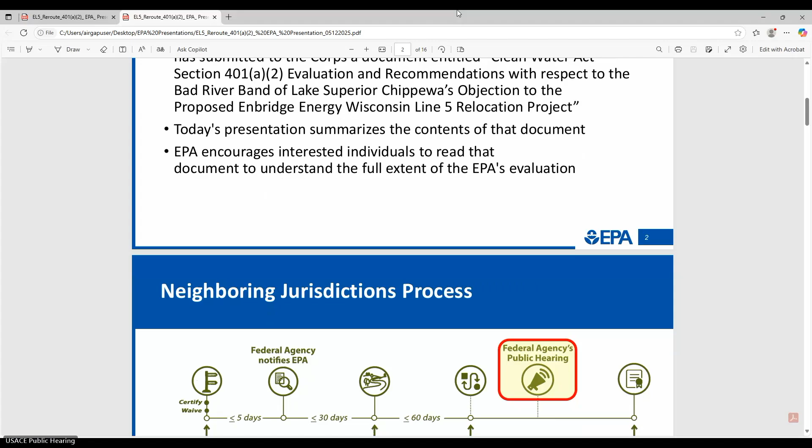I'd like to start by providing a bit of an overview of the neighboring jurisdiction process as outlined by Section 401A2 of the Clean Water Act. This begins on the left-hand side of the figure here, when a federal agency, in this case the Corps, receives an application and a certification or waiver from a jurisdiction. In November, the state of Wisconsin provided its 401 certification regarding the project to the Corps, which initiated a 5-day process for them to notify EPA of that receipt, which they did. That started a 30-day period for EPA to determine whether discharges from a proposed project may affect the water quality of a neighboring jurisdiction, in this case, the Bad River Band of Lake Superior Chippewa, and we made such a may affect determination in December.

This started a 60-day process for the Bad River Band of Lake Superior Chippewa to determine whether discharges from the project will affect its water quality so as to violate any water quality requirements. They did so in February and objected to the issuance of the permit and requested the public hearing that the Corps is hosting today. The Corps will collect information heard here and make its permitting decision.

So we are focused today on the proposed reroute around the Bad River Band Reservation. It is a 41-mile reroute of the Line 5 pipeline with projected impacts to include 101 acres of temporary impacts to 534 wetlands, 0.2 acres of temporary impacts to water bodies, including 72 jurisdictional crossings, and 0.02 acres of permanent impacts to wetlands.

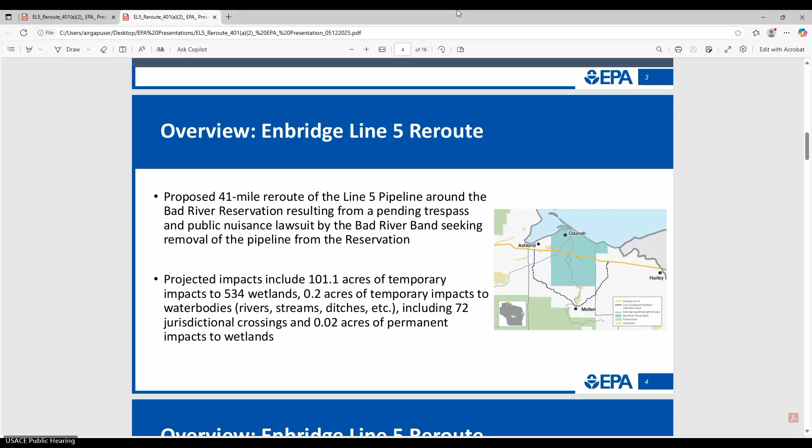Proposed discharges from the project to waters of the U.S. include construction matting placement to access construction areas, trenching to install the pipeline, blasting where hard rock complicates excavation, and horizontal and directional drilling and direct drilling to facilitate placement of the pipeline below water bodies to avoid surface disturbances.

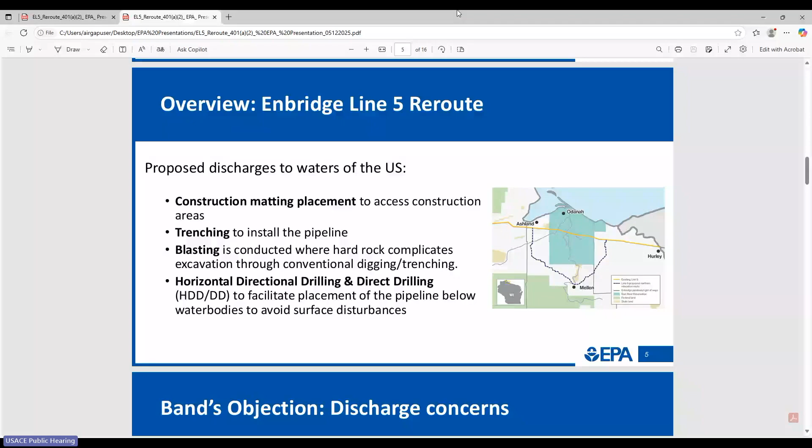I will now turn to an overview of the Band's objection. The Band's objection raised concerns with discharges of primarily four types of activities, the ones on the previous slide.

These include concerns regarding construction matting, including increased stormwater discharges, discharge rates, runoff, sedimentation, and thus increased turbidity, introduction and transportation of invasive species, and temporary impacts lasting longer than planned.

With regard to trenching, the Band's objection raised concerns for discharges for soil destabilization, sediment discharges, and pollutant transport, soil compaction and mixing, leading to discharges resulting in altered soil water holding capacity, hydrology, groundwater processes, soil and sediment chemistry, and invertebrate and wetland plant habitat, and possibly the release of mercury and methyl mercury.

The objection also raised trenching concerns regarding removal of vegetation from water courses crossed by open trenching that would result in impacts lasting longer than temporary or that will not be restored to pre-construction conditions.

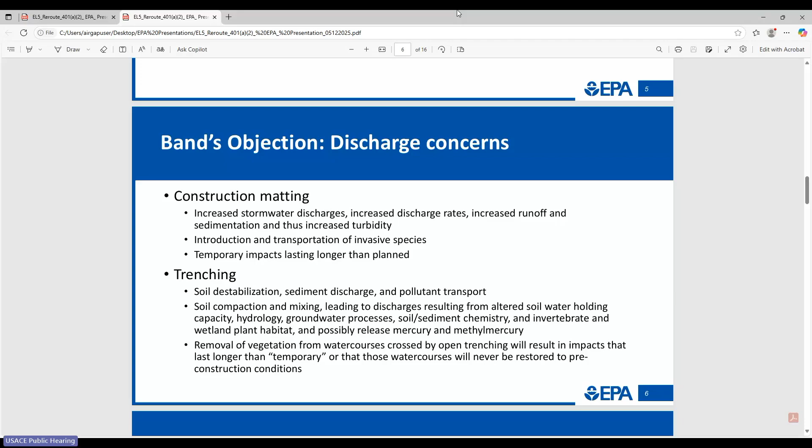The Band's objection included discharge concerns with respect to blasting, including the effect of blasting residue on water quality and the contribution of pollutant loadings to water bodies, specifically nitrates, fuel oil, perchlorate, mercury, and other chemicals.

Substances such as PFAS and PFOS, radionuclides, asbestos, arsenic, sulfur, and nitrates that may be discharged during the blasting process, and altered groundwater flow paths, groundwater levels, and groundwater surface water interactions, including changes in surface water temperatures.

The objection raised discharge concerns regarding horizontal directional drilling and direct drilling, including the permanent conversion of wetlands due to establishment of a permanent maintenance corridor, increased turbidity and impacts to macroinvertebrate communities and fish spawning beds, including lake sturgeon.

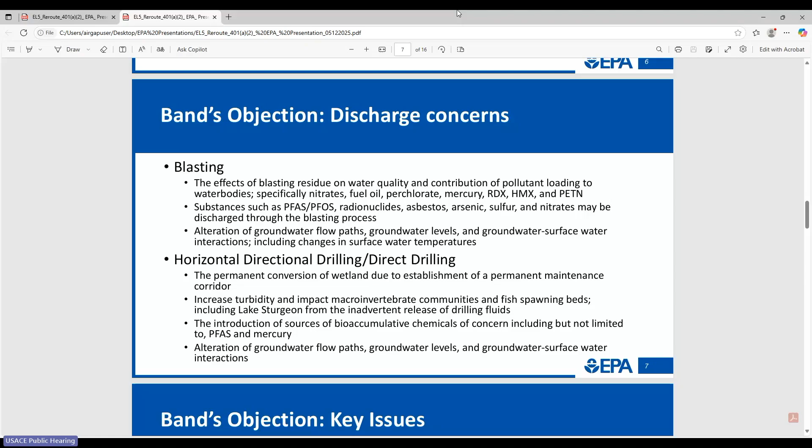And the inadvertent release of drilling fluids, and an introduction of sources of bioaccumulative chemicals of concern, including but not limited to PFAS and mercury, and also altered groundwater flow paths, groundwater levels, and groundwater surface water interactions.

The Band's objection raised key issues, including that conditions in Wisconsin's permit and 401 certification will not ensure that the Band's water quality standards and other water quality requirements will be met for regulated activities that discharge to waters located upstream or adjacent to surface water.

The objection said the project will result in non-compliance with the Band's anti-degradation provisions and the criteria, both narrative and numeric, derived to protect designated uses and existing uses of the surface waters within reservation boundaries, and will cause or contribute to lowering the water quality below minimum conditions necessary to support designated and existing uses of the reservation's waters and waters hydrologically connected to those waters.

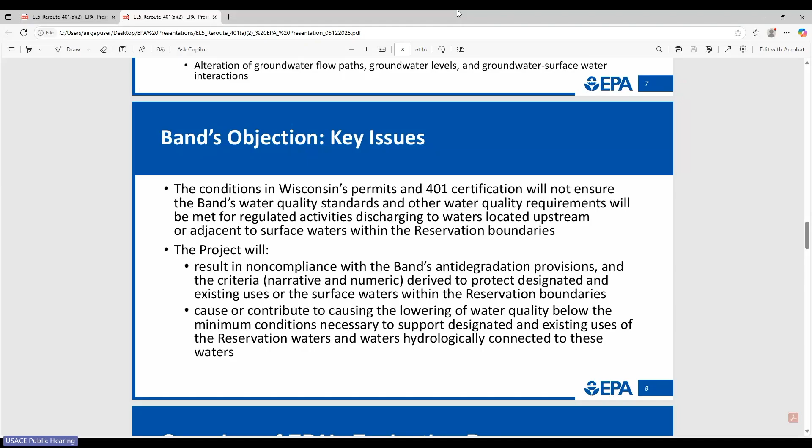So I will turn next to an overview of our evaluation process. Under Section 401A2 of the Clean Water Act, EPA interprets our role as an objective and neutral evaluator, providing recommendations to the Corps based on expert technical analysis of the objection and other relevant information.

We presented the full document for our evaluation and recommendations to the Corps, and are presenting an overview of that here, as directed by the Clean Water Act Section 401A2, that at such a hearing EPA will present recommendations with respect to any objection.

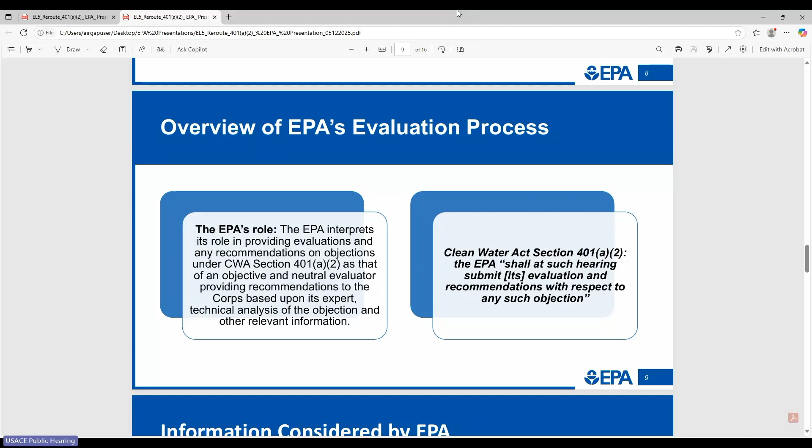We considered a wealth of information in our analysis, including documents from the Bad River Band and Enbridge, documents from the Corps and EPA, and from the Wisconsin Department of Natural Resources. Many of these documents have extensive appendices, addendums, and updates, and this includes all of those. So this might appear to be a short list, but it represents a wealth of information that we considered.

EPA also received new documents and data provided by the Bad River Band on May 6th, last week. Receipt of this information on short order before today's hearing did not allow sufficient time to conduct a thorough evaluation of it, particularly the technical memorandum, evaluation and impacts of Line 5 Wisconsin Relocation Project on hydrology and water quality at the Bad River Band's reservation. We did not have sufficient time before this hearing to analyze, draw conclusions, or form recommendations from this new information.

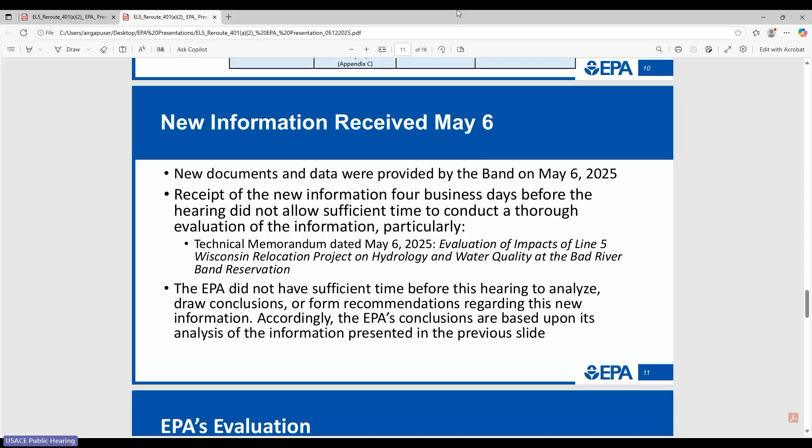Accordingly, our conclusions are based on the analysis of information on the previous slide.

In short, for our evaluation, neither the information provided by the Band in support of its objection letter, nor the information contained in other documents reviewed by EPA demonstrated that discharges from the project in any of the four categories, including pollutants in such discharges, will reach the Band's waters in amounts that will result in a violation of the Band's water quality requirements. The new information that we received last week, we have shared with the Corps for its consideration in its future permitting decision.

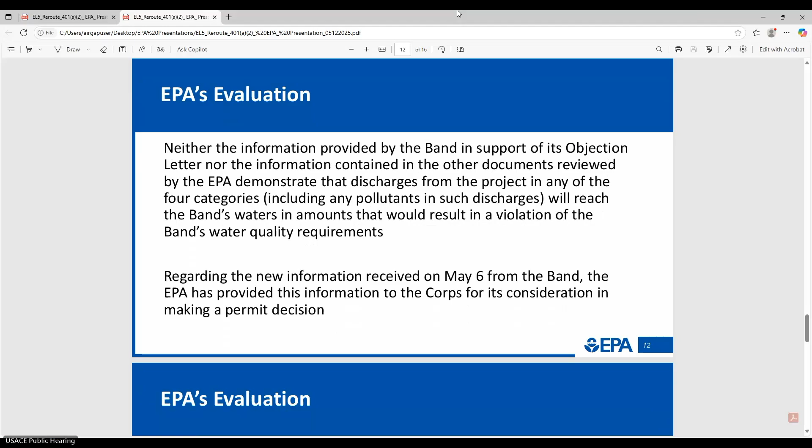For some more details on our evaluation, the objection cited two modeling efforts by the Band's consultants. However, neither the modeling report nor details regarding the data and methods were provided.

The objection asserted certain discharges will alter groundwater flow paths and groundwater surface water interactions. However, data, studies, modeling, or other analysis of these complex interactions at specific sites, or how the discharges would adversely affect the hydrology of aquatic resources, were not provided.

And the objection cited general articles, scientific studies, and case studies. However, none of them substantiated the Band's assertions about pollutants in discharges associated with the specific project reaching the Band's waters.

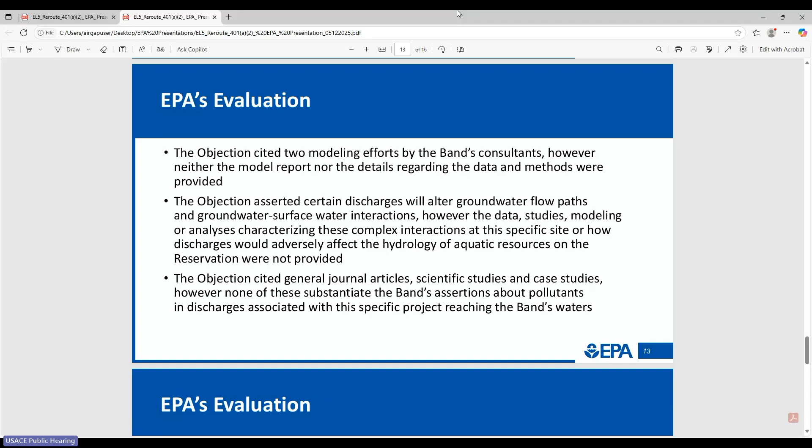The materials EPA reviewed did not provide data, studies, or modeling analysis that showed and quantified impacts of distance from any given discharge point to water quality on the reservation, the likelihood of discharges, including pollutants traveling from groundwater to surface waters and then to the reservation boundary, or predicted quantities of pollutants in Enbridge's discharges or receiving waters.

The materials did not compare predicted changes in pollutant levels against background conditions and natural variability, evaluate other impacts on the landscape, or demonstrate how discharges would adversely affect water quality so as to violate the band's water quality requirements. The only document that specifically addressed whether pollutants would reach the band's waters was a sediment discharge modeling report prepared by a consultant for Enbridge, showing that sediment discharges associated with the project will not have a discernible impact on water quality at the reservation boundary.

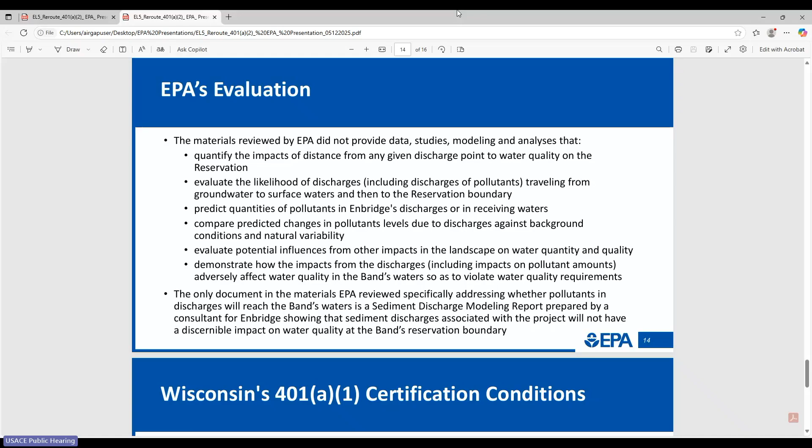EPA also evaluated Wisconsin's 401 certification conditions, and any Clean Water Act Section 404 permit, if issued, must include conditions from Wisconsin's certification, which included conditions for addressing all 4 discharge types.

Many of those conditions minimize the risks that discharges will adversely affect the quality of the band's waters, including best management practices for erosion control measures to reduce sediment transport, inspection and maintenance requirements for best management practices, construction matting and access roads, crossing waterways and wetlands, preventative measures to avoid the spread of invasive species, continuous monitoring for signs of inadvertent releases, and restoration requirements for disturbed areas.

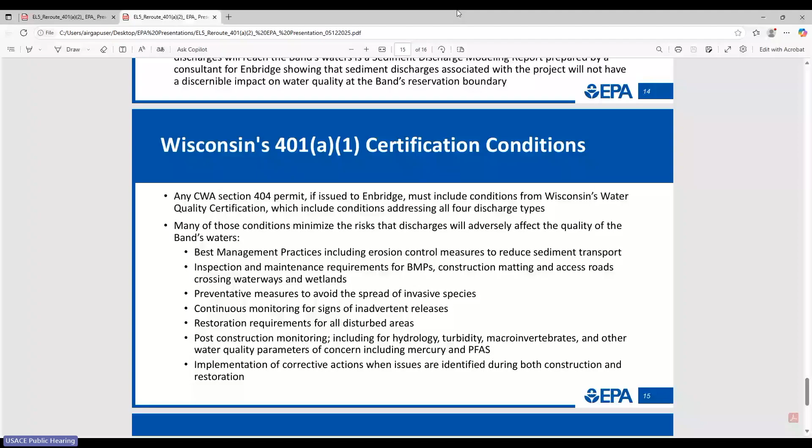It also included post-construction monitoring, including for hydrology, turbidity, macroinvertebrates, and other water quality parameters of concern, including mercury and PFAS, and implementation of corrective action when issues are identified both during construction and restoration.

So in conclusion, following the analysis described, EPA concludes that neither the band's objection letter nor the other sources of information that we reviewed support the band's determination that discharges from the project will affect the quality of the band's waters so as to violate any water quality requirements. Therefore, EPA is not offering any recommendations under Section 401(a)(2).

EPA also provided the information that we received from the band to the Corps for its consideration in making its future permitting decision. Thank you for the opportunity to join you this morning. I look forward to hearing the rest of the discussion.

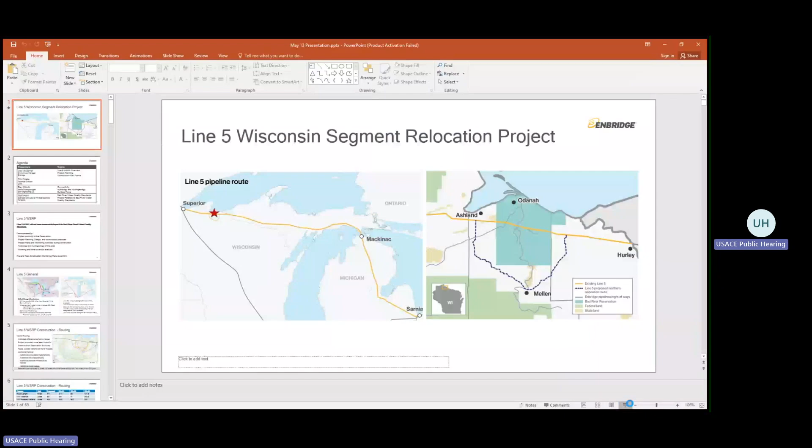Screen. Yeah, you got it. Thank you very much. Should be. There we go. Thank you. Buttons figured out, Tim? You got the buttons figured out? Yeah, just, I think so.

All right. Good morning. Thank you, everyone, for the opportunity to present on Enbridge's Line 5 Wisconsin segment relocation project. I'll refer to it as Line 5 or the project after this. My name is Joe McGaver, a manager environment projects with Enbridge. I have a chemical engineering degree. I'm a licensed professional engineer in Minnesota.

And I've been working on similar pipeline routing, execution, and post-construction monitoring projects for the last 18 years. The important context of that experience is having the opportunity for continuous improvement, knowing how things have changed, knowing the actions required to incorporate in the project to get the end result everyone desires. Also presenting with me today will be Tim Drake, Ray Wulo, and Matt Horn.

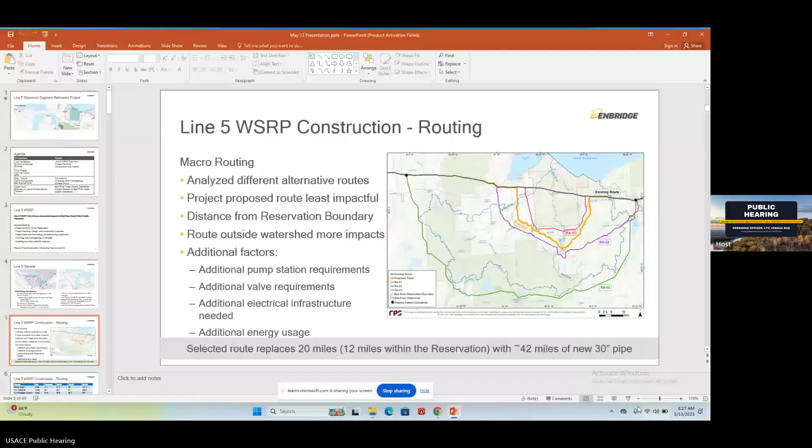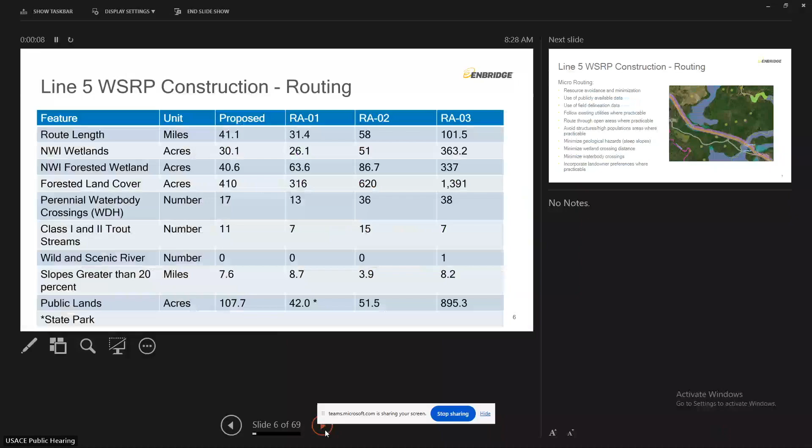The slide here covers the project overview. We did a lot of routing efforts.

When you look at wetland impacts after the routing, 0.02 acres of permanent wetland fill or wetland loss does occur on the project. That's roughly an area 30 feet by 30 feet, like a small house. When you look at a 41-mile project, that's a very small amount of fill compared to a development building structure or parking lot, which can typically go well beyond that in some instances.

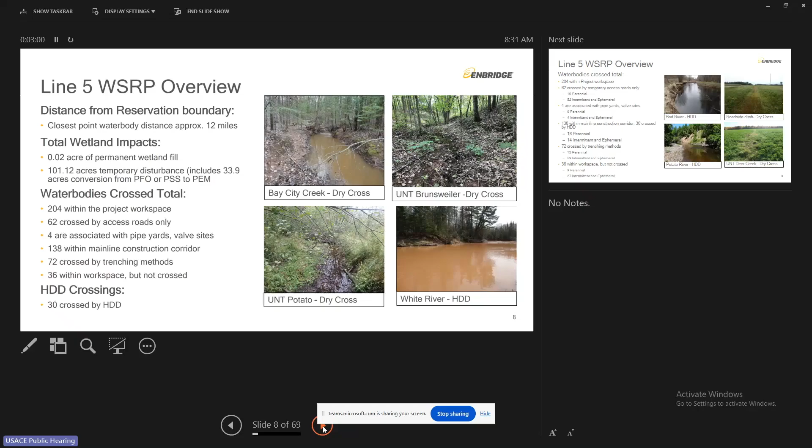More photos here. Upper left-hand corner is Bad River. Bad River will be crossed by HDD in the proposal.

You can see on the upper right-hand side, that's a road ditch, which is an ephemeral or intermittent stream, and would be turned to grass after restoration.

Potato River is in the lower left, also a perennial stream that would be HDD'd, and lower right is another example of an ephemeral or intermittent stream that only has water in it during portions of the year.

You can see the breakdown of the different features on this slide between perennial and ephemeral or intermittent water bodies, with many of the larger perennial streams being crossed by HDDs.

We do have some perennials that are open trench. There's 13 of them, and those are typically the smaller perennial streams on the project.

And you can see there's 36 water bodies in our workspace that are not crossed and would be controlled by erosion control devices, to be discussed later.

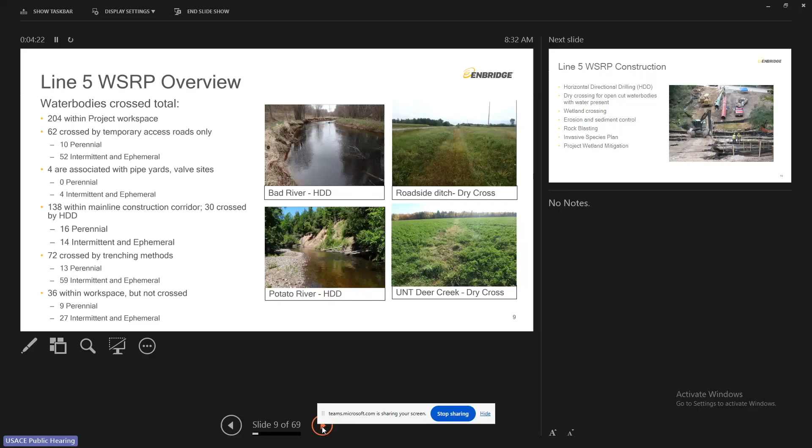The Line 5 project will not impact Bad River's water quality standards. We designed the project for that to be the end result. We'll cover horizontal directional drilling, dry crossings, wetland crossings, and other plans associated with the project to demonstrate that fact.

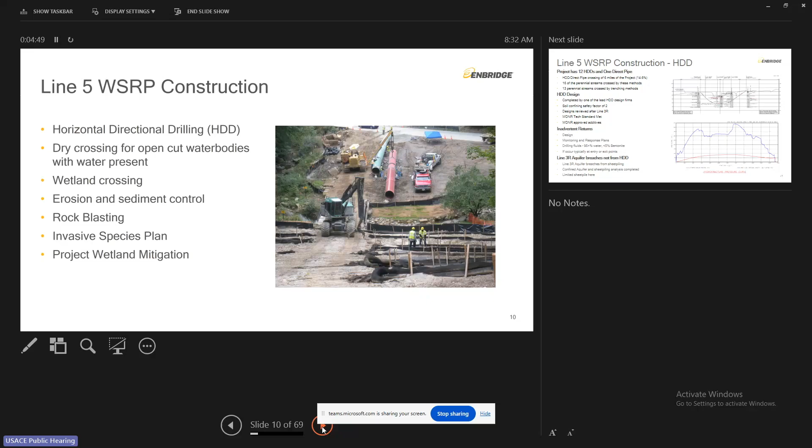For HDDs, we have 12 HDDs on the project, one direct pipe. We go through an extensive design process. We do the geotech to understand the substrate, and engineers then design the HDD.

You can see in the upper right-hand corner, that's a typical HDD profile, where you have your exit and entry points. Due to the curvature of the pipe, the deepest part of the HDD almost always ends up under the feature you're trying to cross. So you can see in this case, the pipeline is like 70 feet below the water body.

The lower right-hand figure, that's a hydrofracture pressure curve, and what that's done is it shows how the project's designed. The blue line is the soil confining factor. The red line is the anticipated drilling pressure.

So when you take the blue line divided by the red, that tells you the safety factor. You can see in this case, underneath the water body, the safety factor is well above 2.

At Enbridge, we don't want to have inadvertent returns as much as anybody, because of the impacts and then the extra effort to clean it up, and other social implications with having a release.

You can see on the hydrofracture analysis, as you get to the exit and entry points, that's where the soil confining capacity gets lower, which if you look at the profile, is because you're getting closer to the ground, so you have less soil to contribute to the confining factor.

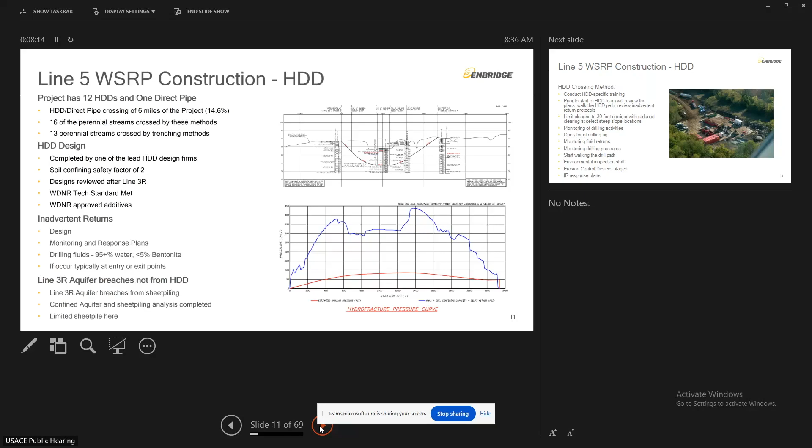So we've designed the project to not have IRs as a safety factor, but you still need to prepare for the what-if, since we're out there working in the environment. Our HDD process will have specific training for the contractors prior to pullback, and we'll have another review session with the team. We have equipment staged, and we have IR response plans.

The drilling operator monitors the drilling pressures to make sure they're not exceeding the pressure, which could overcome the soil confining pressure. We also monitor fluid returns, so if there's a loss of fluid returns, we would shut down the equipment, do extra checking to make sure there's not an IR, and resolve the issue should one occur. We have staff walking the drill path to identify IRs, and equipment staged in the unlikely event one does occur, to clean it up as quickly as possible.

A little bit on drilling fluids: they're actually 95% water, with roughly 5% clay, a little less than that. Drilling additives are all from the Wisconsin DNR approved drilling list. They're what's used in drilling water wells, and some of them are even used as food additives in other applications.

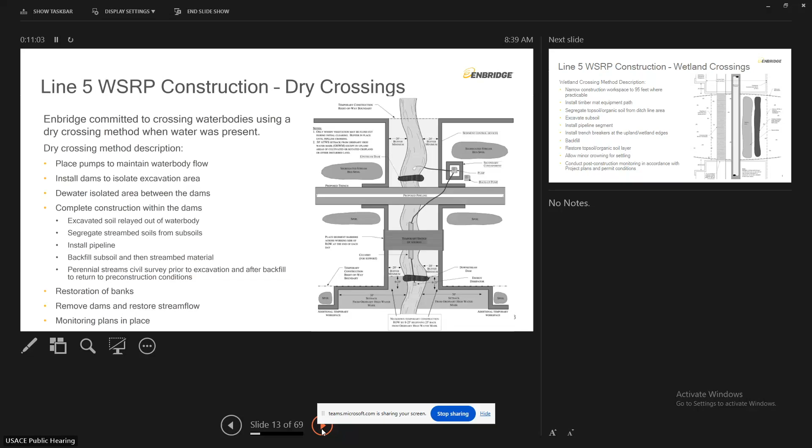Similar with wetland crossings, we've done minimization here. We've narrowed the construction right-of-way to 95 feet. We'll mat the travel lane across wetlands to avoid impacts. As far as wetland excavation, topsoil will just be stripped over the ditch line and placed on a visual barrier, typically straw. Subsoil will be in a separate pile. The pipe will be installed, and then we'll backfill in reverse condition and restore.

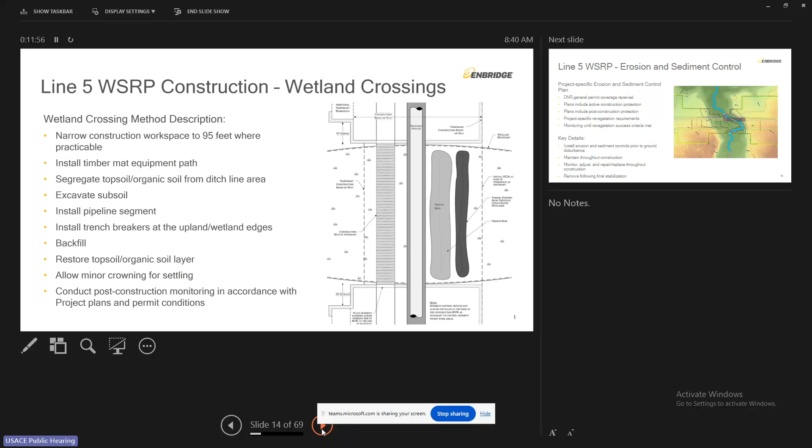We've learned over the years that restoring with a slight amount of crowning, to account for settling that occurs over the years, ends up in the best result. And then we do have our post-construction monitoring to verify results, which Tim will talk about later.

At this point, I'll turn it over to Tim for the next sections.

Good morning, folks. My name is Tim Drake. I'm a technical director of environmental inspection and compliance services within Environmental Resources Management Incorporated. I have both a bachelor's and master's degree in water resources, and I've been working on siting, permitting, construction, and restoration of linear projects for almost 30 years.

As part of the project, Enbridge has developed project-specific erosion and sediment control plans.

These plans incorporate best management practices to prevent erosion from occurring and to minimize the potential for sediment transport following a rain event, snow melt, or strong winds that could carry sediment into sensitive resource areas like water bodies and wetlands, potentially affecting water quality.

These best management practices, or BMPs, follow the DNR's technical standards and include controls such as silt fence, straw bales, biologs, erosion control blankets, straw mulch, and other products used in different applications and at different times throughout construction and restoration. Once installed, erosion sediment controls are inspected and maintained until vegetation is reestablished following construction.

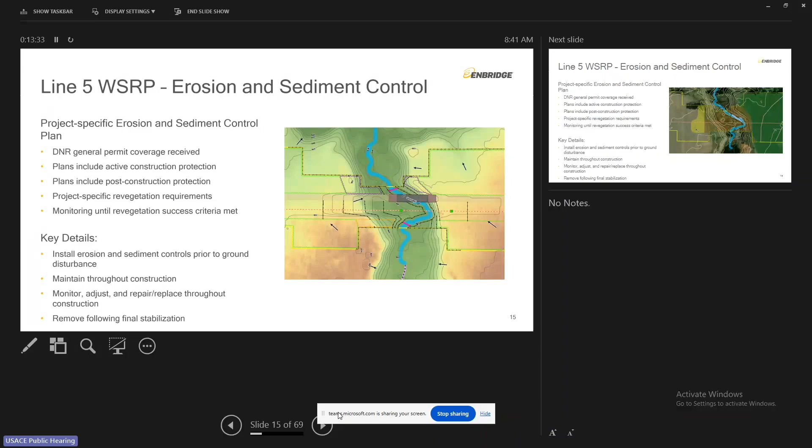The diagram here shows erosion control devices that were installed at a slope down to a water body that has been graded to allow for construction activities to occur in a safe manner to install that pipeline.

This next slide shows the exact same area, but the erosion sediment controls have been replaced, reestablished to account for restoration of the original slopes and contours at the specific water body. These will all remain in place until successful revegetation has been established.

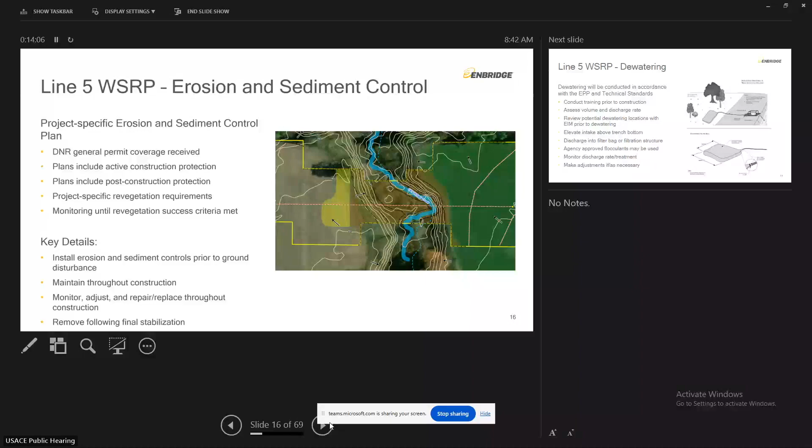Dewatering is part of the excavation process, or may be part of the excavation process, depending on groundwater inflow into the open excavation. It's needed to facilitate inspection of the excavation prior to installation of the pipeline to verify that the depth has been excavated to the right level, as well as that there's no obstructions in the ditch, such as a large rock that may damage the pipe or the pipe coating.

Dewatering, similar to erosion controls, will also be conducted using best management practices and in accordance with permit conditions to prevent affecting water quality in adjacent wetlands and water bodies.

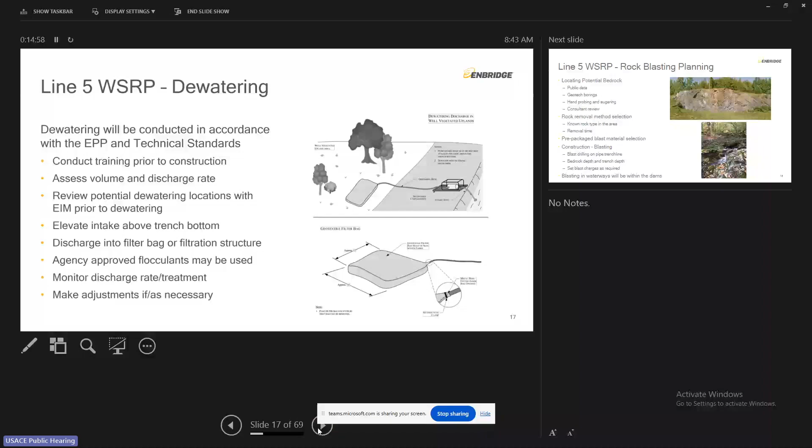The project has conducted extensive surveys to identify areas of shallow bedrock that will require the use of controlled explosives to fracture the bedrock and allow installation of the pipe to the desired depth.

Blasting has been used for other applications by other projects, such as highway projects in the area. The top photograph here is actually areas that were blasted for the construction of Highway 13 just outside of Mellen, Wisconsin. Blasting of trench excavation is not like what you see in the movies where a building or a car blows up, or as it's used in open pit mining, but it's actually a very highly controlled activity.

It takes into account the type of material and the depth of fracturing that's needed. The amount of explosives used is kept to the minimum needed to achieve that fracturing of the rock within the trench line. Where blasting is needed to construct across a water body, temporary dams, as Joe has explained, are used to isolate the construction work zone from the water body and water body flow, pumping that water around throughout the entire construction process. Ray will be talking more about blasting and groundwater in just a few minutes.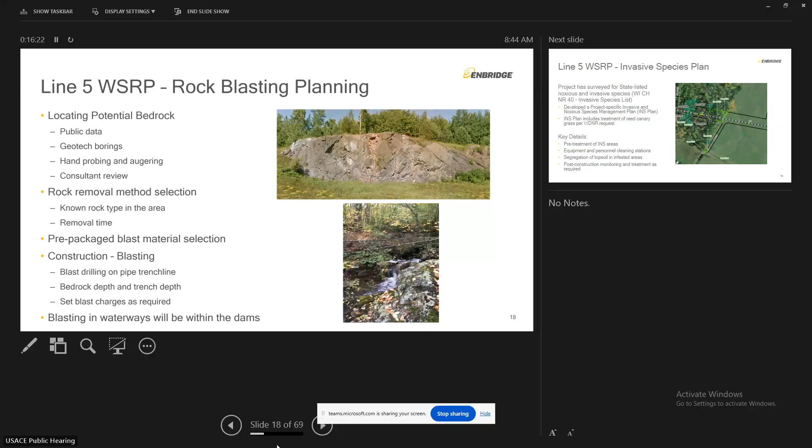The project has also completed extensive surveys for invasive species and has developed a project-specific plan to address invasive species. During our surveys, we identified over 23 different state-listed invasive species within our construction footprint, plus one additional species, reed canary grass, which Enbridge was asked by the Wisconsin DNR to treat as an invasive species, even though it is not a state-listed species.

The plan includes pre-treatment of the identified areas, as well as active equipment and personnel cleaning during construction. But it doesn't end there. Enbridge will continue to document the success of invasive species management throughout the construction process and will treat areas where weeds have been introduced or have expanded within the project workspace following construction.

The project has also developed a very robust water quality monitoring plan that incorporates the collection of water quality samples from both wetlands and water bodies crossed by the project, upstream and downstream of the proposed crossing location. Samples were collected in 2023 and 2024 across the project.

Data from these samples were used in conjunction with data from other water quality studies conducted in the region to establish baseline water quality conditions and get a better understanding of what those existing water quality conditions are within the region.

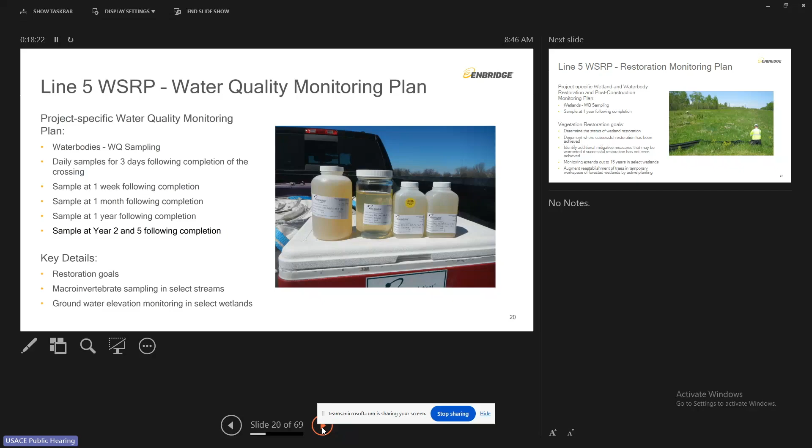In addition, the project has also developed a very robust post-construction wetland and water body restoration and monitoring plan that outlines specific restoration goals for establishing and reestablishing vegetation within this disturbed portion of the project right-of-way.

The plan includes wetland monitoring for up to 15 years following construction in forested wetlands, and replanting select tree species within the temporary workspace and forested wetlands to augment natural revegetation of trees that were cut during construction. Enbridge's revegetation plan will supplement the natural revegetation of areas disturbed during construction, reducing erosion potential and helping to restore the land to conditions similar to pre-construction.

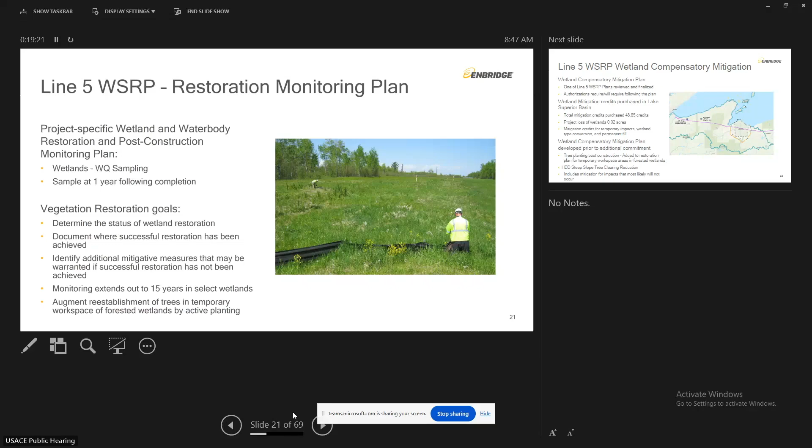Finally, the project has purchased compensatory wetland credits from mitigation banks within the Lake Superior Mitigation Bank service area to offset permanent wetland impacts, including the 0.02 acre permanent wetland fill, the temporary disturbance to wetland habitat during active construction, and the conversion of forest habitat to emergent-type wetland within the 50-wide operational right-of-way that will be maintained in non-woody vegetation to allow aerial patrol of the right-of-way as well as maintenance access for the project.

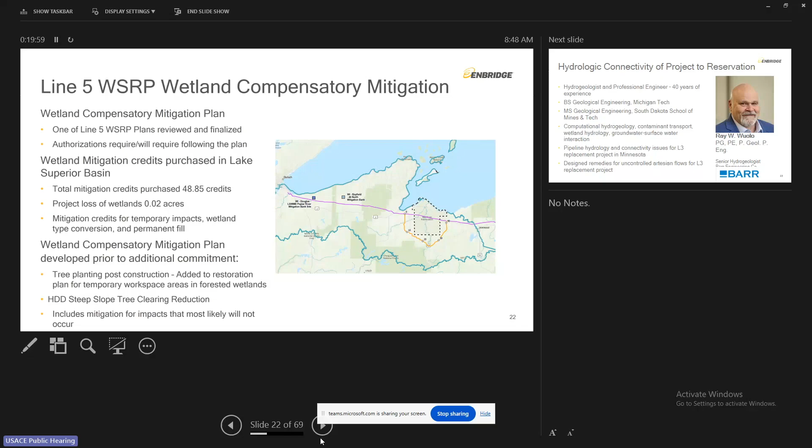Thank you, ladies and gentlemen. Thank you, Commander. My name is Ray Wuolo. I'm a hydrogeologist with Barr Engineering Company. My degrees are in geological engineering, and for the past 40 years I've lived and worked out of Minneapolis, primarily in the glaciated terrains of the upper Great Lakes. Most recently, in the last 10 years, I've been involved in the Line 3 replacement project, primarily looking at post-construction activities and monitoring. I was the primary hydrogeologist involved in controlling the uncontrolled artesian flows we're going to talk about, so I've had a tremendous amount of experience with the hydrogeology and surface water hydrology of pipelines in the upper Great Lakes.

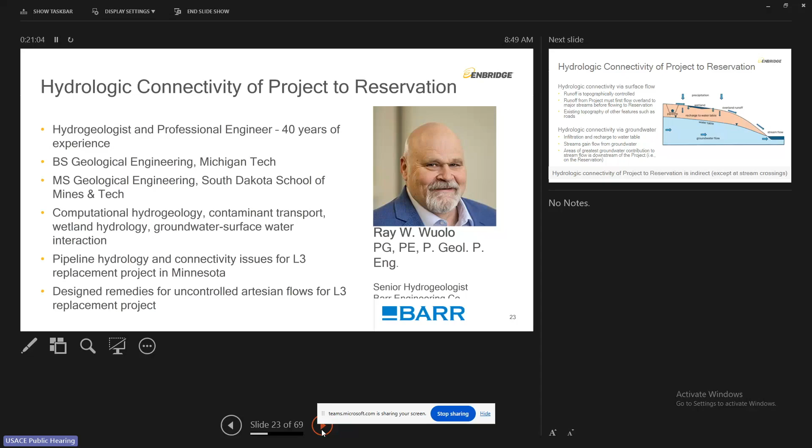Next slide, please. What I'm going to focus on here is the hydrologic connectivity of the project with respect to the reservation. I'll focus on construction and post-construction activities, the hydrogeology and surface hydrology associated with the construction area itself, and then those downstream effects as they would affect the reservation.

The runoff is the primary concern in terms of surface water hydrology, but the runoff that hits the project has to first run overland and flow into the major streams, and the major streams are the connective component from the project to the reservation. Existing topography and other features such as roads and bridges are also a factor in that connectivity.

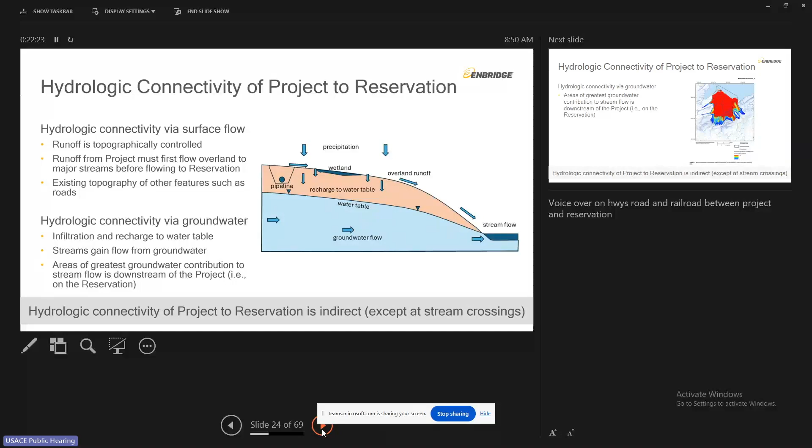In terms of groundwater, infiltration and recharge to the water table has been brought up as a concern, and also how groundwater flow would affect stream flow gains, or lack thereof. The areas of greatest groundwater contribution to stream flow are actually downstream of the project. Most groundwater flow into streams actually occurs on the reservation itself. The hydrologic connectivity of the project to the reservation is indirect everywhere except in the immediate vicinity of the stream crossings.

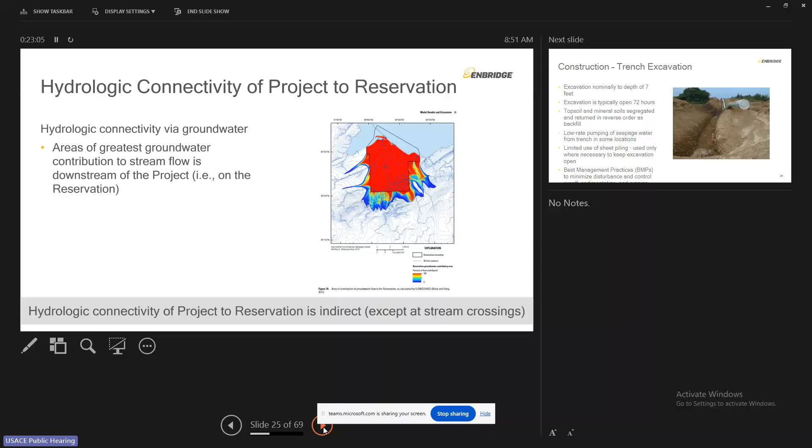This picture is taken from a 2015 USGS groundwater surface water modeling project performed for the Bad River Indian Reservation. What it depicts is, from their groundwater flow modeling, the streams and where the streams gain groundwater. I want to focus on the red area, which shows where the highest amount of groundwater inflow into streams occurs, within the reservation itself. Outside of the reservation there is some contribution to streams, but it's considerably less, and the project crosses those areas.

The first thing I'd like to focus on is construction, specifically what I'd consider a conventional trench excavation, using a backhoe to dig out the trench and lay the pipeline in. Excavation is nominally about 7 feet, varying with topography, but that's typically what we're looking at for this kind of pipeline burial. The excavations are typically open for 72 hours, just long enough to put the pipeline in and verify that it meets requirements, and then backfill begins.

As previously mentioned, topsoil and mineral soils are segregated. In most of the construction area, the topsoil is actually removed prior to construction occurring. In the trench itself, if there's any topsoil, it's laid out separately from the mineral soils below it. After the pipeline is put in place, the backfill is returned in the same order so the stratigraphy will be approximately the same as it was before construction.

As Tim mentioned, there will be some low-rate pumping of seepage water in some locations. In the upland areas, it's unlikely groundwater will be encountered, but as you get closer to wetlands and streams, the water table in this part of the world is very shallow, and there will be some dewatering over a limited amount, just enough to be able to get the pipeline installed and verified.

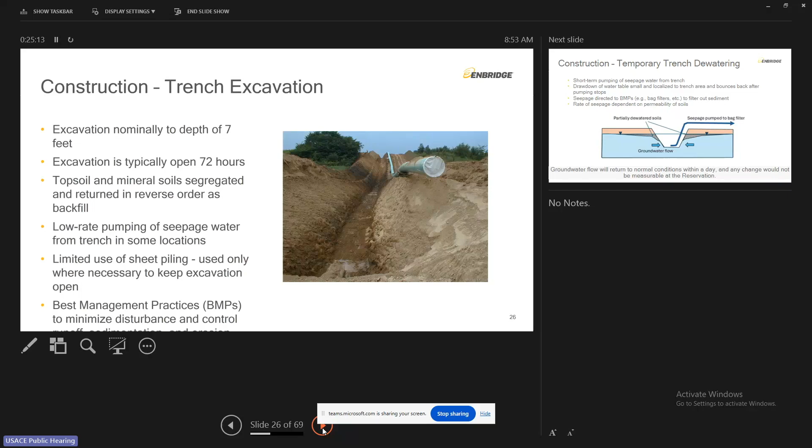In terms of dewatering, it's a short period of time. We're not using well points. We do the dewatering actually in the trench itself, basically evacuating water as the seepage occurs.

This does cause a localized bit of drawdown of the water table. And when I say localized, I mean a few feet. The drawdown is literally a few inches, except immediately adjacent to the slopes of the trench where you get a seepage face developing, but the drawdown is very limited. As soon as pumping stops, groundwater has an elastic response and comes back. That drawdown curve is logarithmic, so it's reduced to zero as you move away from the trench.

The seepage that's being pumped out is directed to various BMPs, bag filters as necessary, to take out any sediment, including colloidal material, before it's discharged to the ground. The rate of seepage depends on the permeability of soils. Normally, the groundwater returns to its initial condition about a day after construction occurs. In this localized event, there's going to be no effect on the reservation groundwater or surface water flows associated with dewatering.

The hydraulic impacts associated with the excavation are short term. There's a number of features included to minimize, actually to prevent, sedimentation. The thing that strikes me about this project is each crossing and each construction has its own BMP designed for the particular topography and setting, so it's not one size fits all. There's been a lot of thought put into making sure sedimentation does not occur at the construction, including delineating the work areas and stabilizing the topsoil. These impacts are going to be localized and short term, a matter of days.

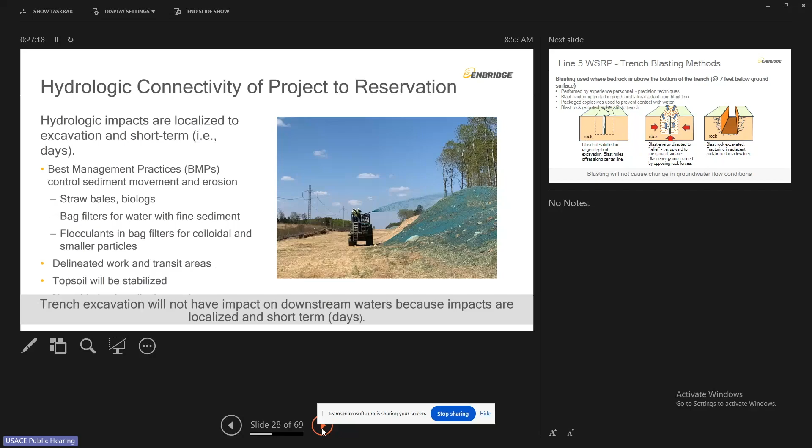Now, trench blasting gets, I think, a lot of confusion associated with it because people think about big explosions, particularly associated with mines. Trench blasting couldn't be farther from that. It's a very specialized form of disaggregation of bedrock. The blast holes are staggered along the trench line along its center line.

They only go to the depth of the target of the trench. The blasting takes place on the same day that the explosive is placed in each of the holes, and the blasting energy is directed upward — we call that relief. Many times people have tried to use explosives, for example, to enhance permeability for wells, and it doesn't work at all. The reason is the confining forces of the rock, both sideways and up, prevent that blast energy from moving out into the trench. So the material and the energy moves up — it's basically fluffing the rock, and then the excavator comes and removes that material.

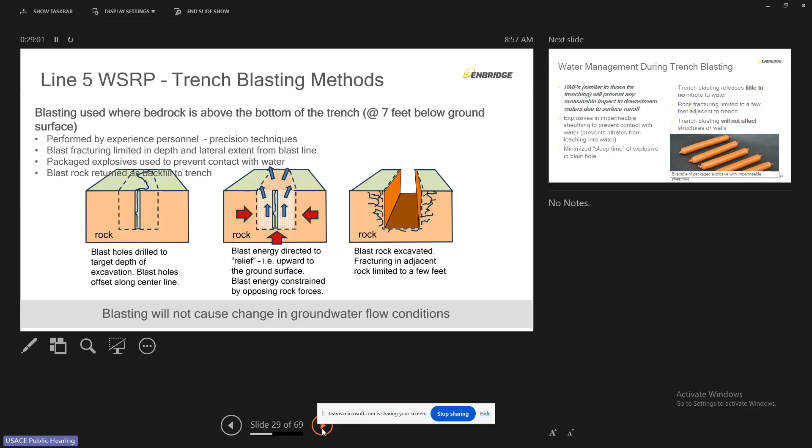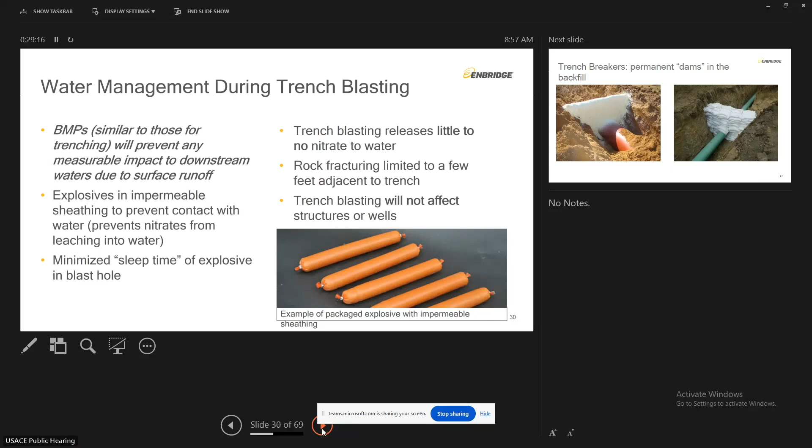During blasting, the BMPs employed will be similar to those used in regular trench excavation. One thing to understand is this type of explosive is a packaged explosive, sheathed in an impermeable material like a sausage, so it isn't poured down the hole, which is what is typically done in mining conditions. These explosives are designed for the size of the blast that's going to take place, and they're put into the holes.

The sleep time, the time that they're allowed to be in the hole where that explosive might be in contact with the water, is kept very small. What that means is that the leaching of any kind of nitrate materials from the explosive itself is essentially zero. And then when the trench blast occurs, there may be some residual, but generally speaking, these blasts are pretty complete. Matt Horn will talk a little bit more about what the consequences, or lack thereof, would be about the residual nitrate in the blast.

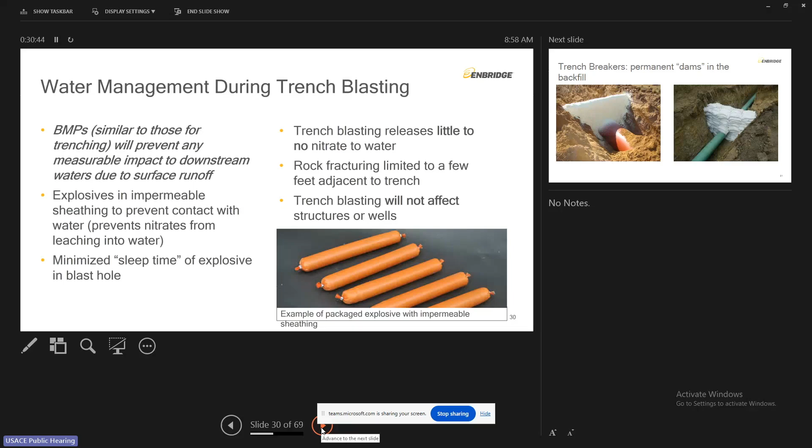The last thing that I think there's a great misnomer about is that trench blasting is going to affect structures and wells. They do not. I have seen situations where local well owners have complained about a blast after the fact, and when you look in the well, what you find out is the well is old. It has a lot of encrustation and material in it. It probably had problems with iron staining beforehand, but explosives in this condition are not going to affect wells, and the wells and structures are very, very far away from any of the blasting.

Once the trench, either blasted or excavated, is constructed, in some locations there will be what is called trench breakers installed in the trench. They're essentially underground dams, and they're either a foam material that's sprayed in, or, in the case on the right-hand picture, sandbags with an impermeable cover. What they're designed to do is prevent groundwater flow from moving along the backfill after it's returned into the trench, essentially preventing the excavation from acting as a French drain.

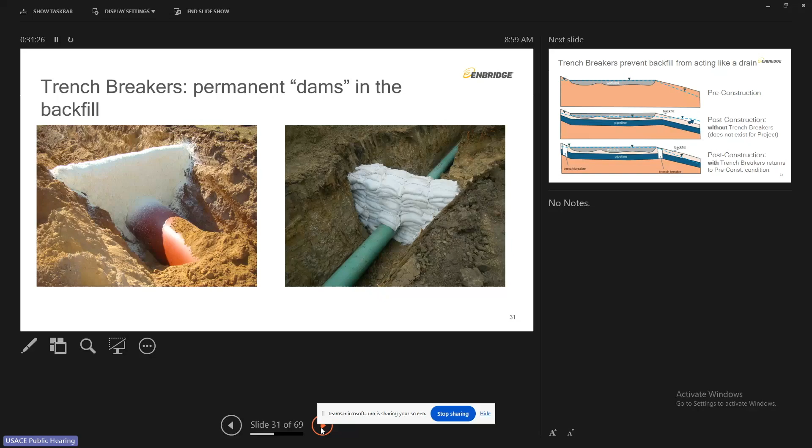Here's an example of how this works at a wetland. On the top slide, we have a schematic cross-section of the wetland with the water table shown, and you can see the water table is right about at ground surface in a wetland, as in many cases it is.

When the construction occurs, there will be a trench installed through the wetland and the pipeline placed, and then the backfill returned into the trench in the same order that it was removed, or actually reverse order, so that you have the mineral soils first around the pipe. If you didn't do anything else, that pipeline and its backfill could become a conduit for preferential flow that could cause some drawdown in the wetland.

The way to prevent that, and this has been a very tried and true method that I've seen many times in the upper Midwest in pipelines, is to install these trench breakers on either side of the wetland. What that does is make the water level in the wetland equal all the way across, and two things happen: you don't get any drainage of the wetland, and you don't get the development of any seeps down gradient of the wetland.

In the last year and a half, I've done some monitoring up on Line 3 at various locations where we've put in very discrete multi-level piezometers in and around trench breakers, and they are extremely effective at preventing groundwater flow from going across them.

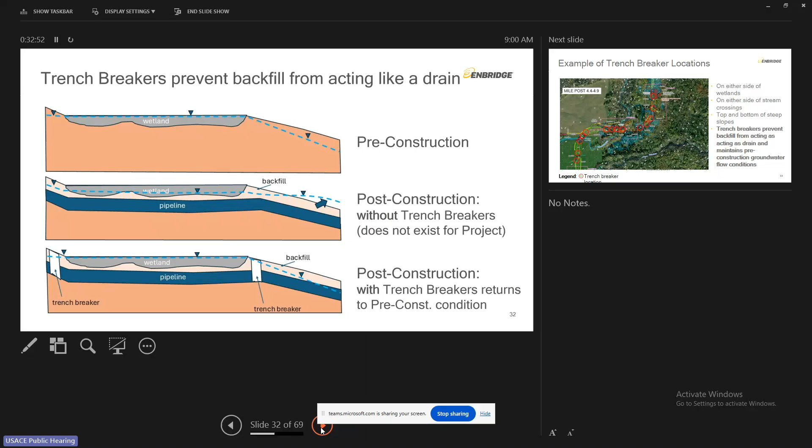Here's an example from this project of the proposed locations for trench breakers at mileposts between 4.4 and 4.9. What I want to draw your attention to are these red circles. Each one of those red circles is a location where a trench breaker has been planned to be placed. You can see that there's over 10 trench breakers in this small area.

They go along either side of wetlands, and along either side of stream crossings where the slope of the topography is relatively steep. Multiple trench breakers will be placed there so that there wouldn't be gravity feeding down into that pipeline backfill material. The trench breakers prevent backfill from acting as a drain, and they maintain the groundwater at pre-construction conditions. Every segment along the proposed project has this kind of a plan where these trench breakers have been identified.

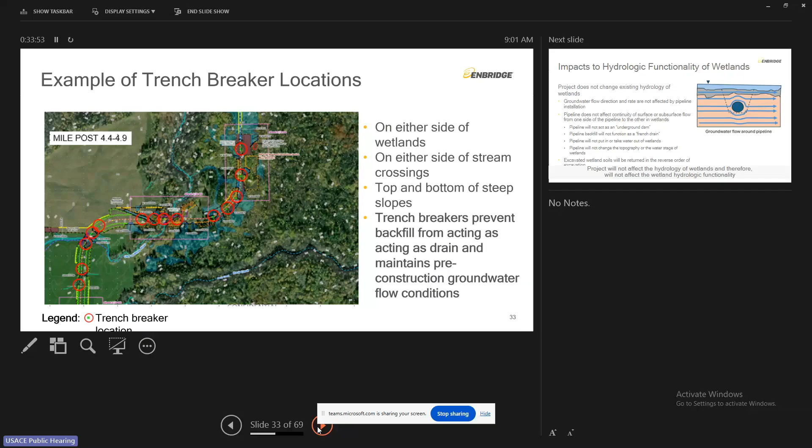I think another misnomer that occurs with regard to pipelines and groundwater is that a pipeline, which is inert, acts as an underground dam that prevents groundwater from flowing across it. Nothing could be further from the truth. Groundwater flows slowly. Groundwater aquifers are thick, tens of feet thick or even more in most cases. And what happens is groundwater doesn't even see the pipeline.

I've often used this analogy: a pipeline in groundwater is like putting a wire in a stream. The flow just doesn't see that; it just goes around it without any impact. I have never in my career seen a pipeline buried properly, that is, not at the ground surface, act in any way as a dam. The excavated soils are returned in reverse order, so the hydrology of the wetland and its functionality will be similar to what it was before construction.

Talk a little bit about artesian conditions, because they did gain notoriety in the Line 3 replacement project.

I want to mention what an artesian condition is before we talk about how this project is addressing that. An artesian condition is where groundwater is under pressure, under what we call confined conditions, and there is either a well or some other type of material that penetrates into that, causing that pressurized water to not only rise above the confining layer, but actually rise to the ground surface. That's the origin of flowing wells. This is an example on the right-hand side of a flowing well, not as part of this project, caused by the pressurization of groundwater.

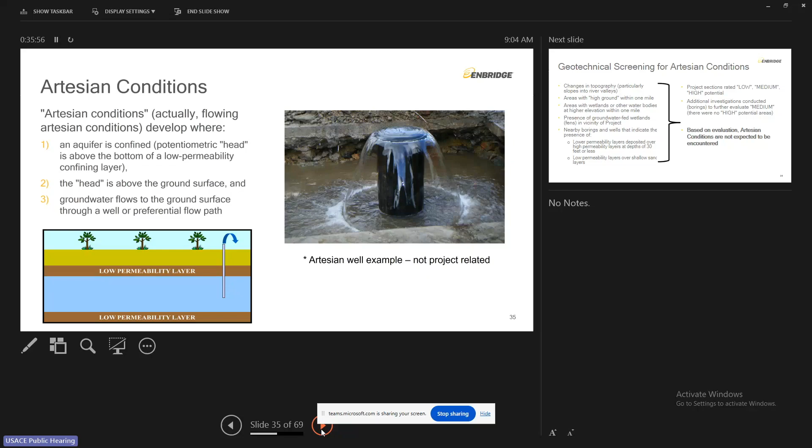So what have we done for this project as part of the artesian conditions? First of all, based on what we learned from Line 3, we went through an extensive screening process on this particular project, looking at the factors that might indicate where artesian conditions would be present.

One is significant changes in topography, particularly along slopes of river valleys—those are areas we examine further. Also areas where there's high ground within a mile, where you could get the development of pressurized water feeding a confined aquifer. Areas where there's wetlands or water bodies in the area that are elevated. And the presence of fens—a fen is a groundwater fed wetland. They always indicate that you have to look much further to see if there are artesian conditions.

And then most importantly, there's been extensive geotechnical borings performed along the site, as well as some available existing borings and wells. Each one of those along that route has been carefully examined to look for low permeability layers deposited over high permeability layers, which would indicate the potential for artesian conditions.

Then the entire project was rated in terms of low, medium, and high potential. We found that based on this information, there were no areas that had a high potential for artesian conditions. But for those areas that had medium potential, further geotechnical investigation was performed by drilling to confirm that there were not artesian conditions present. So based on this, we do not expect any artesian conditions to be encountered here.

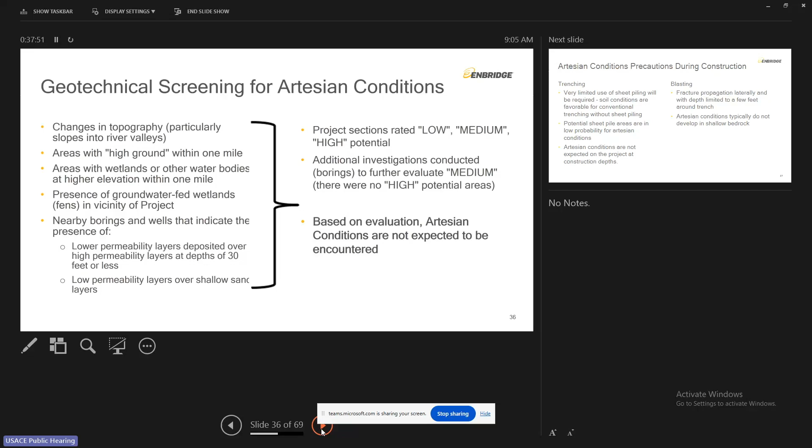Some of the precautions that will be taken during construction: first of all, very limited use of sheet piling. Based on that geotechnical evaluation, we found that very few soils need to be stabilized with sheet piling. Why is that important? Because the Line 3 breaches all involved sheet piling installation driven to about 30 feet, and what happens is they breached a confining layer that wasn't known to be there.

Then as they pulled out the sheets, or with the sheets still in there, we start to get preferential flow paths. What you worry about is that high flow velocity along those flow paths causes piping of soil. That's why artesian conditions are really of concern. But with a limited amount of sheet piling here and keeping the depth of the sheet piling lower, we're going to reduce the possibility further of encountering artesian conditions. We're not even expecting to find them.

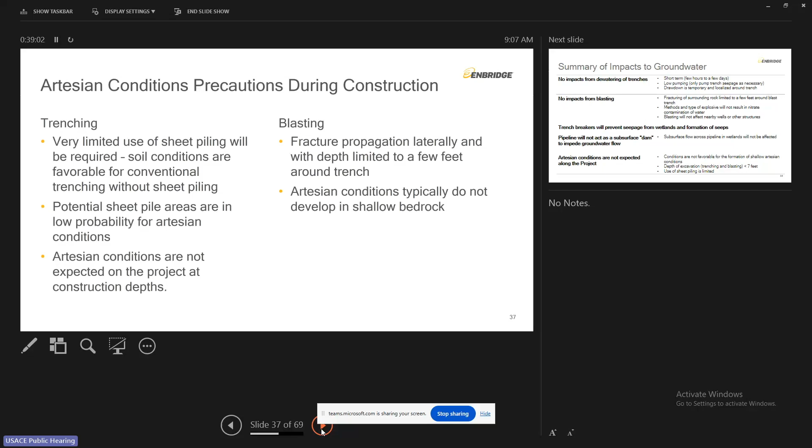With blasting, I already talked about the fracture propagation—it's lateral, only for a couple of feet, and below the trench even less so. So our blasting is not going to cause the development of a preferential flow path in the bedrock.

So to summarize the impacts on groundwater: there's not going to be any impacts from dewatering of the trenches. The impacts from blasting are really zero—it's a localized effect, and it's very controlled. Trench breakers are going to be used to prevent seepage from wetlands and the formation of French drains. The pipeline is not going to dam or otherwise impede groundwater flow or affect the hydrologic function of existing wetlands. And then artesian conditions are not expected on the project, and precautions will be taken during the entire construction to make sure that's the case.

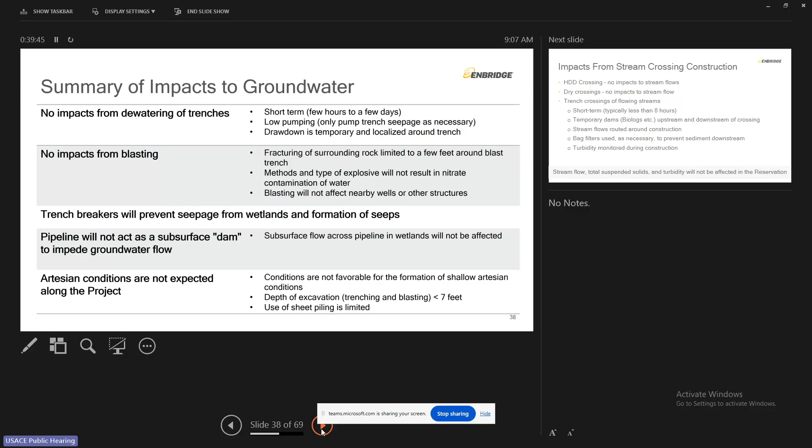So the impacts from stream crossing construction are the next topic. As previously mentioned, horizontal directional drilling, or HDD crossings, are not going to have any impacts on stream flows. You drill underneath that at great depth.

Dry crossings, that literally don't have any water in them, like ephemeral streams, there's not going to be any impact to stream flow, obviously.

Trench crossings and dry crossings with flowing streams are going to be short-term. Typically, the damming process and construction are less than 8 hours. In the morning it starts, by the afternoon the pipeline's put in place and it's over with.

The use of temporary dams, biologs, et cetera, upstream and downstream, are going to prevent water from being in the construction area, and any dewatering that takes place is going to be routed through various BMPs to prevent downstream migration of sediment or increases in turbidity.

Where there's really fine material, bag filters will be used, and if there's colloidal or clay material, a flocculant will be placed in the bags to prevent that, because a flocculant basically takes really fine clay particles and breaks down their van der Waals forces so they can aggregate together and be large enough to be physically filtered out by the bag filters.

Turbidity will be monitored during construction and then extensively afterward. So stream flow, total suspended solids, and turbidity are not expected to be affected downstream of these constructions and won't be impacting across the reservation boundary.

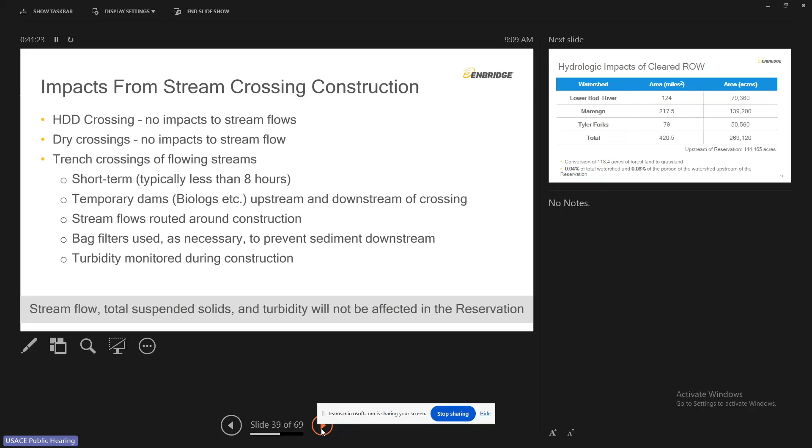Next slide, please. Now we're going to focus a little bit on the hydrologic impacts of the cleared right-of-way. Primarily, this is what happens after construction's been completed. I wanted to bring this up to put in perspective the amount of area that's going to be impacted.

There's about 270,000 acres in the larger Bad River watershed. Of that, 144,000 acres are upstream of the reservation. Of that 144,000 acres, 118.4 acres of forest land will be converted to grassland, because the right-of-way has to be, by law, maintained to be opened and free from large shrubs. That's the law, so it's going to be converted to managed grassland.

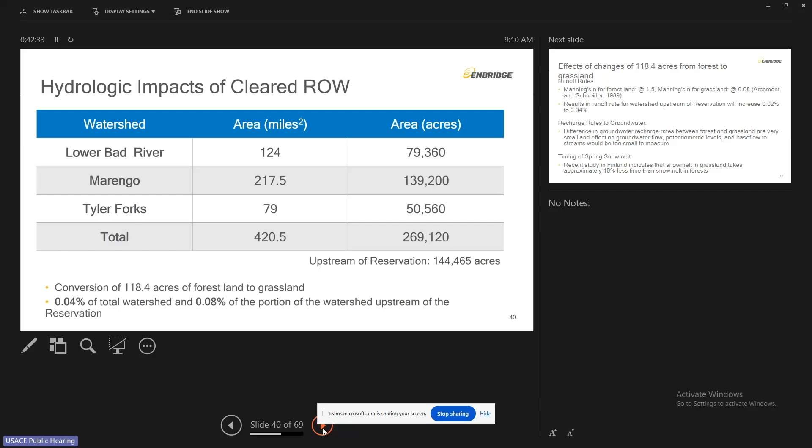What that amounts to is 0.04% of the total watershed of the 270,000 acres being impacted. And if you just looked at those portions of the watershed upstream of the reservation, that's 0.08% of the portion of the watershed that would be affected. That's the water that feeds into the reservation.

Next slide, please. So what are the effects of changing this 118 acres from forest to grassland in terms of hydrology? One is runoff rates. We express runoff in many ways, but one of the most common is looking at Manning's n, which is used to develop runoff coefficients. A higher Manning's n, or roughness coefficient, indicates more resistance to overland flow. A deciduous forest would typically have a Manning's n of 1.5, whereas a grassland would be about half that, 0.08.

What that means is the runoff coefficient will be reduced by about 50%. What that will result in, if you look at the aggregate for the project, is an increase in runoff overall of 0.02 to 0.04% into the streams that feed the reservation. That's an unmeasurable difference. The other thing is these open grasslands will change the recharge rate to groundwater nominally.

The differences in groundwater recharge rate between forest and grassland are very small. I'll give you an example: the USGS's modeling in 2015 for the Bad River Indian Reservation used a program called Soil Water Balance, developed by the USGS. The SWB model uses different recharge coefficients for different types of materials. The recharge coefficient used in that model for both grasslands and deciduous trees is almost identical. What that's telling you is that the change in terms of how that affects recharge to groundwater is going to be too small to be measured at the reservation.

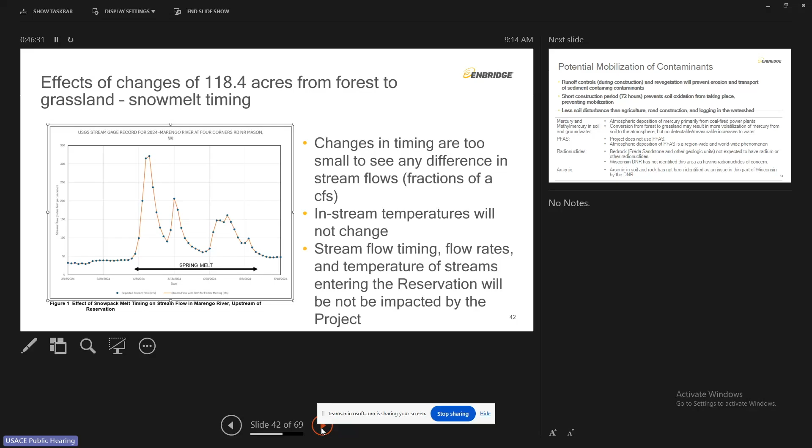Concerns have been raised about mobilization of contaminants. Runoff controls during construction and revegetation are intended to prevent erosion and sediment transport. Many types of metals, in particular, don't move by themselves. They move in contact with sediment. So by controlling sediment, you control many things like arsenic, radionuclides, which, by the way, neither one is really present here.

Radionuclides are not known to exist in the Freda sandstone in northern Wisconsin. The DNR has not identified this area as a location where soil and rock will have radionuclides of concern. Likewise, other metals such as arsenic are not known to be of a concern in this portion of Wisconsin.

With respect to mercury and methylmercury, mercury is a unique metal in that it can actually volatilize at ambient temperature. So when you turn over some soil, you may get some mercury that has been deposited globally from coal-fired power plants and is everywhere and ubiquitous in soil. You might get some mobilization back into the atmosphere of mercury. But the important thing to remember is the soils are only exposed for a brief amount of time.

If they're exposed for a larger amount of time, the organic soils are covered, so that prevents them from oxidizing. We don't expect that the conversion from forest to grassland is going to have any effect at all in terms of mercury concentration in water and runoff. And certainly you would not be able to detect any changes in mercury downstream at the reservation.

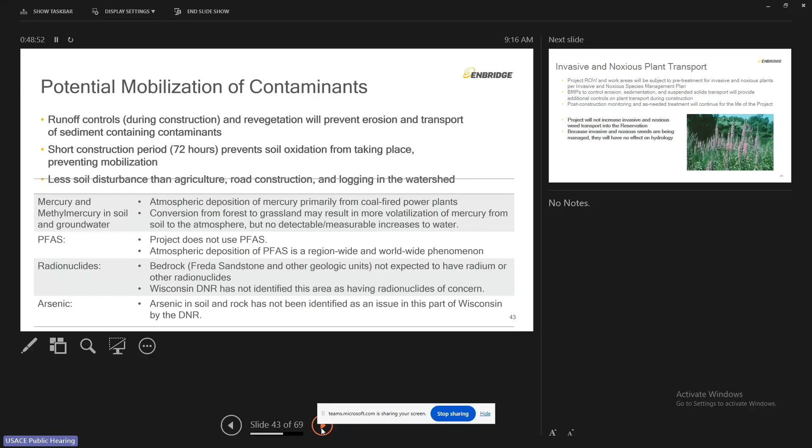Invasive and noxious plant transport by water is also a concern, because there are other ways, of course, to transport noxious weeds - the seed heads and portions of the plant. Animals, of course, move that around all over the place. Wind moves that too. But what we're focusing on here is how will this project, in terms of water, increase the transport of invasive and noxious plants.

First of all, prior to construction, the noxious plant management plan that's going to be used is going to involve pre-treatment along all the construction areas to knock down existing invasive species. And then the BMPs that control sediment during and after construction are designed also to control the movement of those materials as they move through the water column.

And then post-construction, and this I think is really interesting, there'll be routine monitoring for the presence of noxious and invasive plants, and spot treatment as necessary for years on end after the construction is completed. The project is not going to increase the invasive and noxious weed transport to the reservation, and in all likelihood, because of this management process, is going to decrease the contribution.

And you know, the bottom line is that the hydrology is not going to be the path in which that material is moved.

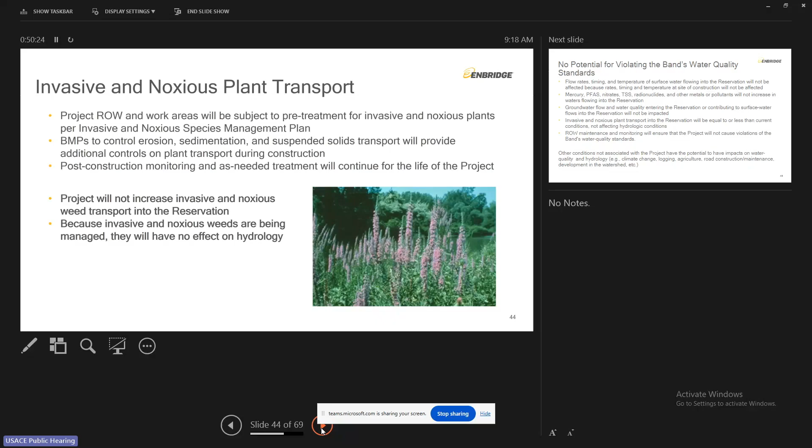So to summarize, I'd like to go through what I just talked about a little bit. There's not going to be any potential for violating the band's water quality standards on the basis of hydrologic connection, because the flow rates, the timing, and the temperature of surface water flowing into the reservation is not going to be affected by the project, either during construction or after construction. That includes measurable changes in timing or temperature of water. Contaminants such as mercury, PFAS, et cetera, nitrates, they're not going to be increased in flowing waters into the reservation.

And Matt, who's going to speak next, is going to talk a little bit more about nitrates as well. Groundwater flow and water quality entering the reservation or contributing to surface water flows into the reservation are not going to be impacted. Invasive and noxious plant transport into the reservation is going to be equal to or less than what's currently occurring out there. And the right-of-way maintenance and monitoring is going to ensure that there isn't going to be any cause for violations of the band's water quality standards during or after construction.

Other conditions not associated with this project in the upper watershed all have a potential for impacting water quality - things like climate change, logging, agriculture, road construction, maintenance, developments in the watershed, et cetera. They all are contributing to change. We live with change. Our object here is to make sure that this project is not contributing to that change. Thank you.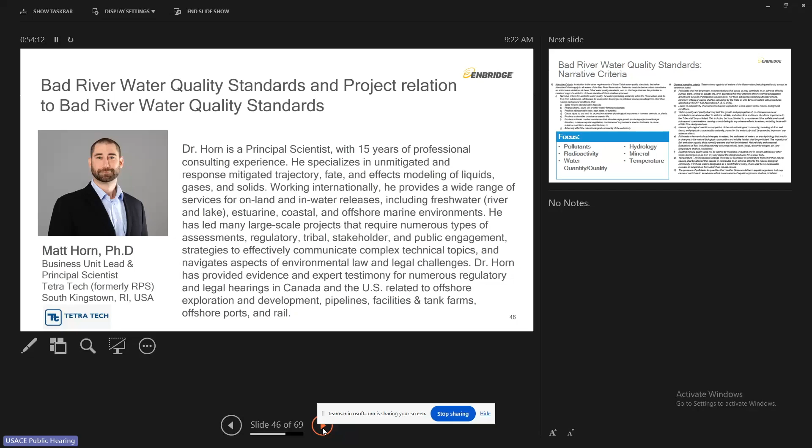I'm going to touch on various other water quality criteria like pH and DO and a number of other things to talk about the quantitative metrics. But what I first want to do is introduce you to a little bit of the narrative criteria that the Bad River Band has set forth. I've copied and pasted onto this slide. I'm not going to read through this by any stretch. The narrative criteria and general narrative criteria for water quality that the band has set forth. When you do read through this, there are a number of different concerns that are laid out, specifically in 6 different areas.

The first concern is around pollutants. The second is on radioactivity. The third on water quantity and quality. The fourth on hydrology. The fifth on mineral changes, and the 6th on temperature.

As it relates to pollutants, this is a construction-related project, right? This is excavation of waterways with the potential for an inadvertent return. Pollutants are going to be a very small portion of what I'm going to be talking about because there are not hazardous substances that are being introduced with this project. As Ray mentioned, radioactivity should not be a concern because the rock material that is contained in this area does not contain radionuclides.

The excavators and other things that Enbridge would be constructing for this project are also not radioactive, so this is not a concern. The project itself will not affect the water quantity.

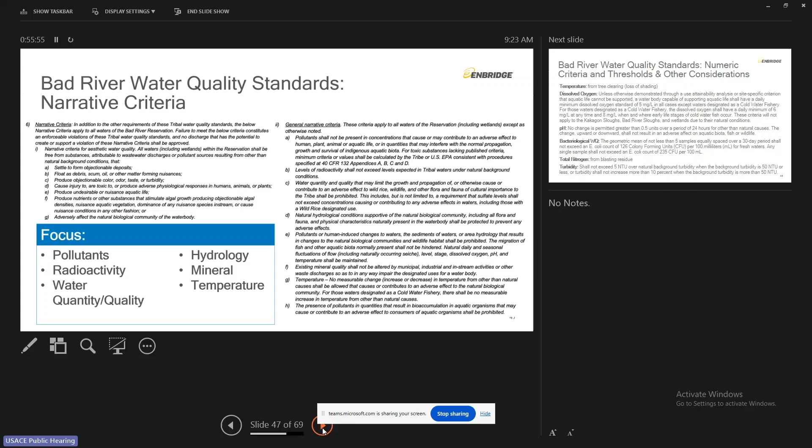There are potential concerns around water quality, and I'm going to get to those specifically around total suspended solids within the water. As Ray has gone into depth, there should be no changes to the hydrology in the area, and there are many different methods that have been employed to ensure that the hydrology does not change. The rocks, the soils, and other things are going to be put back into place in the same stratigraphy, so there should be no mineral changes. And I'm going to talk a little bit more about specifically any potential change to temperature.

The Bad River does also have water quality standards with specific numeric criteria. Those first ones were a little bit more loose. As it relates to specific criteria, there are numerical ones associated with dissolved oxygen, pH, bacteriological water quality, and turbidity. What I'm going to do is walk through from start to finish, leading with the ones that have minimal potential for effects and finishing with the one we've done extensive modeling on.

To talk about what those potential effects are going to be, specifically around turbidity and sediment disturbance. But very quickly, temperature has the potential to be affected in this area by tree clearing, which would remove trees adjacent to waterways, reducing the amount of shading, so there's more light, which can warm the water. That temperature change can result in changes to dissolved oxygen throughout the waterway, where very specifically the Bad River Band has stipulated that daily minimum dissolved oxygen concentrations should be 5 milligrams per liter in all cases, or 6 or 8 for those cold water fisheries and those waters that might have the early life stages of cold water fish.

For pH, very specifically, there should be no change greater than about 0.5 units over a period of 24 hours. You're going to notice that some of these criteria have a change based upon baseline. So this is 0.5 units from baseline, with the understanding that the baseline pH in many of these waterways actually changes itself. So this accounts for additional change on top of that natural variability.

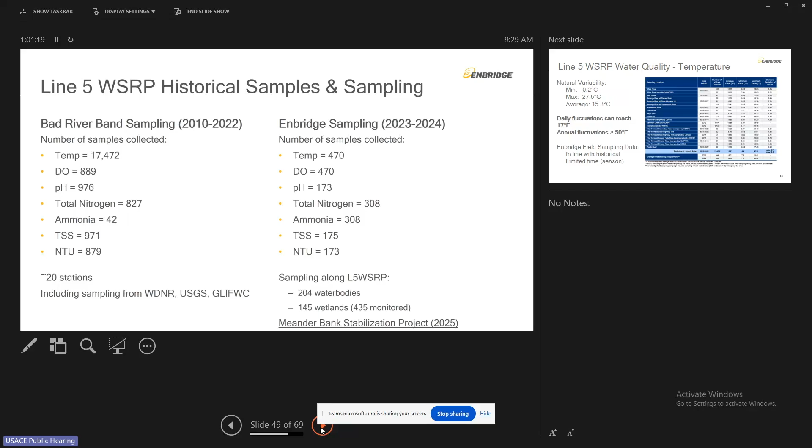So what I'm going to do over the next several slides is walk you through a combination of first an understanding of what the natural variability is, and then on the second slide in each one of these, I'm going to talk about the project's predicted change from natural variability. Each of these slides is going to be laid out the same. In the upper left-hand corner, we're going to be looking at the minimum values, the maximum values, and the average across that statistic historical data, which is going to be on the right-hand side shown in that light blue bar.

All of the data from basically the Potato River at the bottom all the way up to the top of the White River is all of that historic sampling between 2010 and 2022 that was conducted. We've got in that first column the number of values collected. Here we've got over 17,000 temperature samples. Then the data, either average value, minimum value, or maximum value for the next three columns, as well as the standard deviations. I'm providing all of this data to give you that understanding of just how much variability there is.

When we're talking about the water temperature in this area, in northern central US, which has hot summers, has cold winters, that water does freeze, you do see annual fluctuations of about 50 degrees Fahrenheit in water temperature, and daily fluctuations in temperature can exceed 17 degrees Fahrenheit in just one 24-hour period. That's going to be really intense solar heating during the day, and then you get that clear cloudless night where you're going to get lots of cooling. Water temperature can vary extensively.

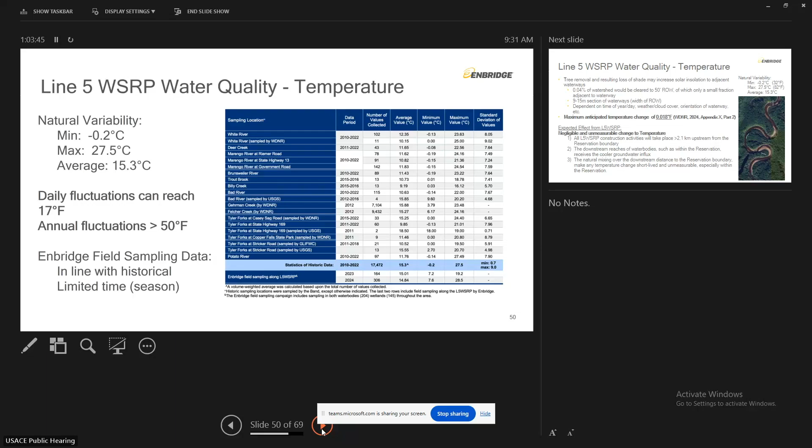So for temperature, remember we were talking about what are the potential impacts to temperature from this project, and we're really considering the removal of trees resulting in a loss of shade, which can then increase the solar insolation or the amount of sun hitting the water in those areas adjacent to the waterway.

Ray has identified that about 0.04% of the watershed would be converted from forest lands to this grassland. And that's going to be a 50-foot right-of-way in which only a very small fraction of that is going to be adjacent to a waterway. If you were going to imagine yourself standing on the right-of-way next to a waterway, only a couple meters or tens of meters away from the bank are you going to have any sort of an impact on the amount of sun reaching the water.

If you were at, and on the bottom right-hand corner, I'm going to show you that meander, and that kind of gentle line moving through that meander from east to west is the existing Line 5 pipeline.

If you were to stand at that meander on the eastern bank, the only time the sun could impact that waterway with a little more sun would be either early morning when the sun is in the east, or late afternoon when the sun is in the west. If you think of the sun moving from east to south to west as the earth rotates, the solar insolation at noon when the sun is south would be the same. If you were in the waterway on the southern edge of that meander, where the flow goes east to west, the morning and afternoon sun would have no change, and the only increase in solar radiation would be during those noontime hours when the sun was at the south.

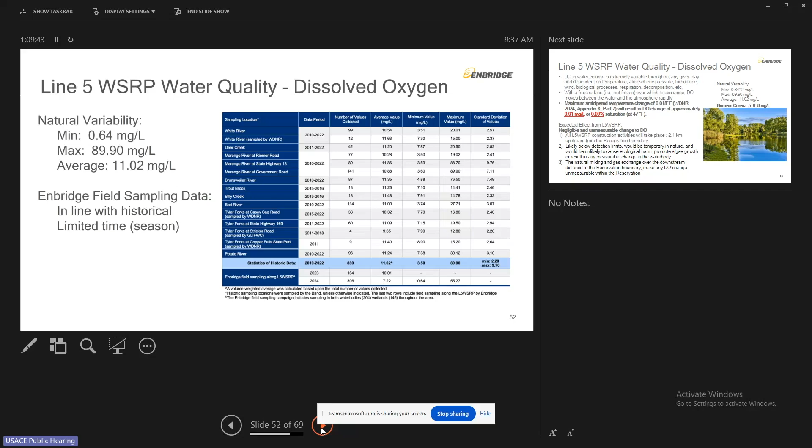Why is this important? Because you do see some of those lower concentrations very specifically within wetlands and other water bodies that might have high organic content and low amounts of water turbulence and flow. So that Enbridge field sampling is great, but it's not one-to-one - in the top 3/4 of those tables, those are all moving waterways. The Enbridge field sampling includes those perennial waterways, intermittent waterways, as well as some of those stagnant water bodies and wetlands.

As you've seen from those minimum and maximum values, which I've carried through in the top right of each one of these, you can see they're extremely variable throughout any given day. It's dependent upon the temperature, atmospheric pressure, turbulence within the water, wind conditions, biological processes, respiration and decomposition. You do see a large amount of variability, and understanding that the numeric criteria state that concentrations need to be 5, 6, or 8, depending on the specific location and time of year.

What we wanted to do is say, look, we do understand that the Line 5 construction activities do have the potential to impact temperature by about 0.018 degrees Fahrenheit, as we saw on that previous slide. Because oxygen saturation is dependent on the temperature of the water, when you see increases in temperature, the water's ability to hold oxygen is actually reduced. Warmer water holds less oxygen.

So if you actually do see an increase in temperature, you see a decrease in the oxygen saturation because it can hold less oxygen. If the water becomes supersaturated, oxygen evades from the water, and therefore the concentration in the water goes down at higher temperatures.

When you look at that 0.018 degree Fahrenheit change, what that is associated with is a DO drop of about 0.01 milligrams per liter, or about a 0.09% change in saturation. So it's not possible to conclude that there would be any measurable change. This is actually below the detection limit of most sondes that would be out there, and certainly at or below the detection limit of the Winkler titration, which is used to calibrate and verify those oxygen measurements of the sondes.

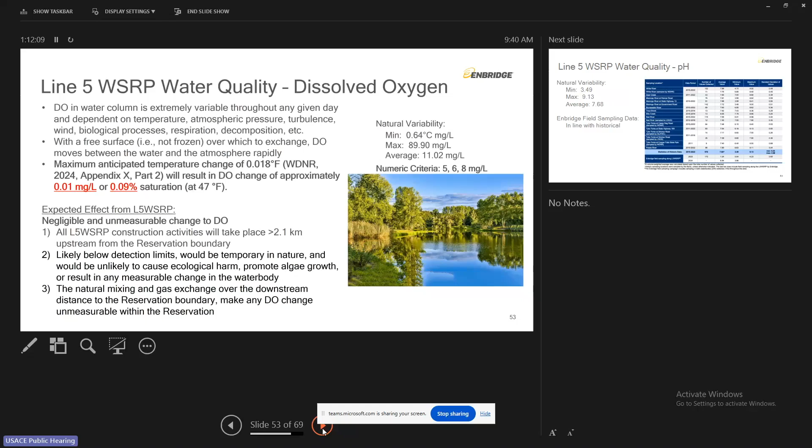Remember that the construction activities would all take place about 2.1 kilometers upstream of the reservation, and because of that, it is impossible to conclude that there would be any kind of measurable change in dissolved oxygen at the disturbance point, or certainly 2 kilometers downstream within the reservation boundary. Therefore, there would be no cause for ecological harm, no promotion of algal growth, or any measurable change to the water body in any way.

pH is a measure of the acidity of the water. For those that remember back to high school chemistry, low numbers of pH, anything below 7, is considered acidic water. Anything above a value of 7 is considered basic water. Vinegars are acids, while sodium hydroxide and detergents are bases.

The minimum values throughout the reservation have been measured to be about 3.49. That is acidic water, typically found within wetlands, fens, and other stagnant waters that have high organic loads and can result in increases in hydrogen ions in the water column. The maximum values are about 9.13, which is slightly basic water.

Remember, pH is a logarithmic scale, which means that when you move away from 7, a value of 8 means there's 10 times more hydrogen ions, and when you move to a value of 9, there's again another 10-fold change. On average, pH within the watershed is about 7.68, which is ever so slightly basic, and when you look at Enbridge's field sampling data, that's in line with the historical values.

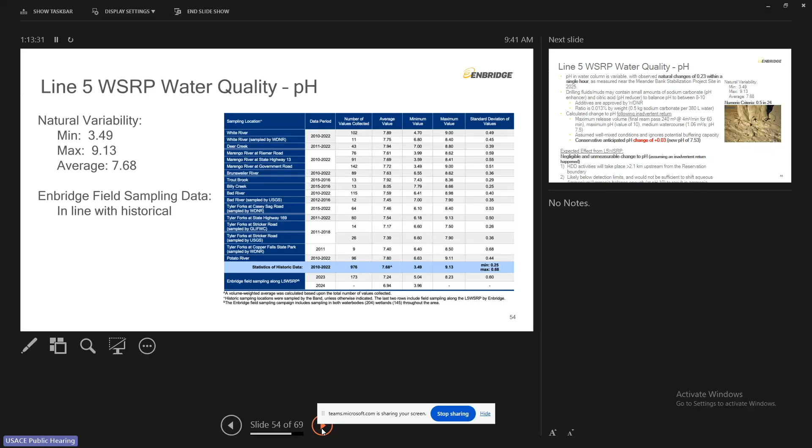Why are we talking about pH? The reason is twofold. The first is around the potential change in acidity to the water body from either acid leaching materials within the rock or from the basic composition of the inadvertent return, the drilling fluids. These rocks within the area, as Ray has pointed out, and DNR has not identified, there are not acid leaching rocks in this location. So we didn't really assess that here because it's not a concern.

What we did do was run through a number of different calculations associated with a potential change in pH from an inadvertent return, recognizing that an inadvertent return is not a planned event, but it's something that's possible during horizontal directional drilling. So pH in the water column is variable - again, on the top right, we see it varied from about 3.5 to 9, with an average value of 7.68. Through that historical sampling, we identified natural changes of 0.23 pH within a single hour. The numeric criteria of the band stipulates that changes should not be any greater than 0.5 within a 24-hour period.

So what I wanted to do was take a conservative assessment and say, let's maximize this inadvertent return, let's put it in a small water body, and let's see what the potential change in pH is. So let me walk you through how I did this calculation.

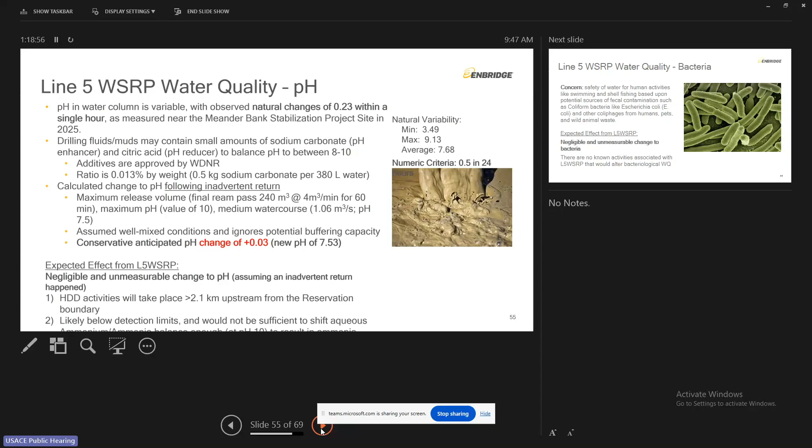Because the pH change would be so small, about 0.03, a pH change that takes us from 7.5 to 7.53 would not result in any potential change in ammonia toxicity.

The next criteria we were looking at was water quality, specifically around bacteria. Bacteria, specifically E. coli, the concern is around the safety of water for human activities like swimming, shellfishing, and it's around the fecal contamination from coliphages from human, pet, and wild animal waste.

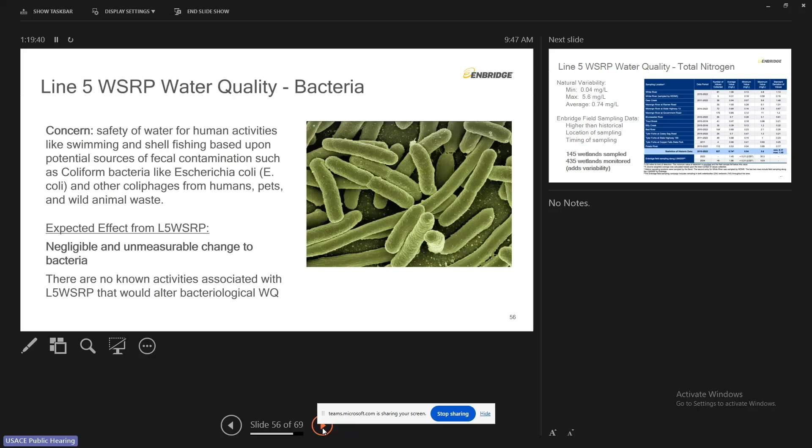When we look at this project, it's a construction project. You're bringing excavators in, you're disturbing sediment. You're not introducing any more waste to the systems. So there are no known activities associated with Line 5 that would alter the bacteriological water quality, and that criteria should not be exceeded.

I mentioned a little bit about total nitrogen in that previous slide, and I kind of want to walk you through a little bit more on that. Total nitrogen is a well-characterized nutrient in the water body. You've got a minimum value of about 0.04 milligrams per liter up to a maximum value of about 5.6.

Average value is about 0.74. When Enbridge went out and sampled, their nitrogen measurements were actually quite a bit higher, almost 2 times higher than the average, than the historical sampling. And what we found is that this is probably the case based on 2 or 3 things.

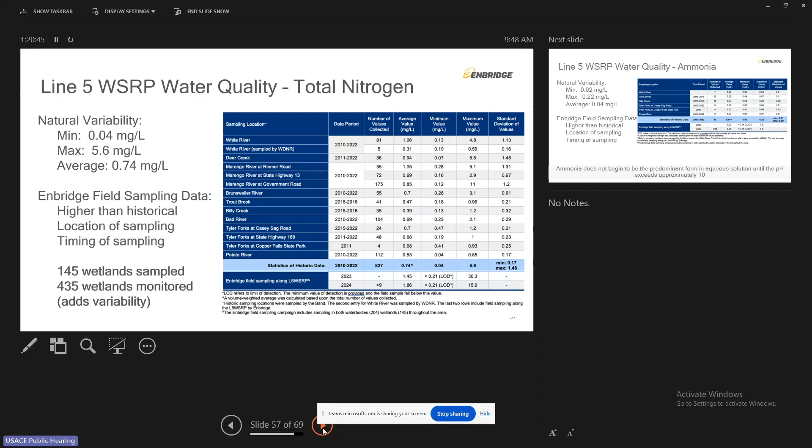The first is the location of the sampling. Remember, we're looking at about 145 wetlands in addition to those perennial waterways. And those wetlands do have a higher potential to have increased nutrients from those stagnant waters. But we also need to think about the timing of the sampling. And a lot of the sampling happened during...